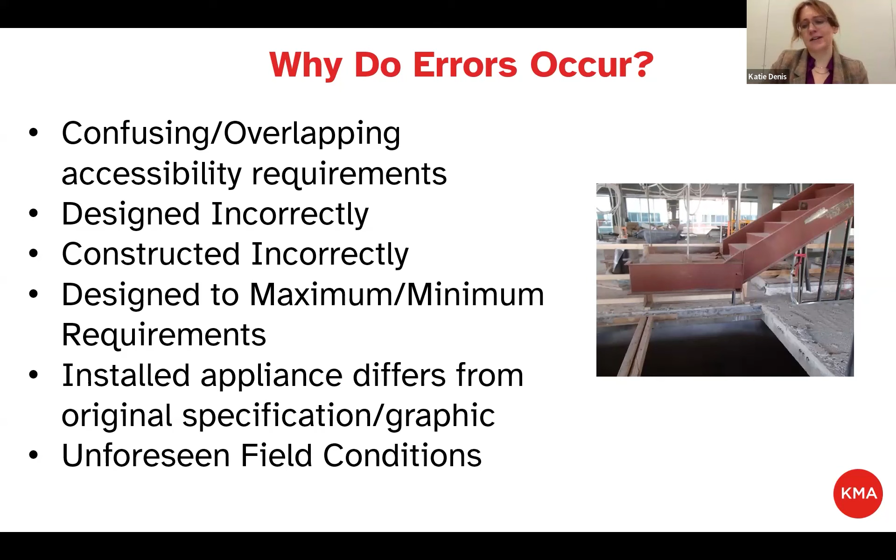Before I get really into the meat of the presentation, I'm sharing all of this not because I'm expecting you to learn all of the dimensional and code requirements today, but instead to put these ideas in your brain space so that when you have a project in your town, you may ask the question, what about accessibility? You'll remember back to this PowerPoint and go, hey, Katie said something about toilets or sinks, let me look back on this presentation, or let me reach out to one of the resources she gave, so that you can avoid these types of errors.

So let's start with multiple codes and standards. In Massachusetts, we have 521 CMR. 521 CMR is part of our building code. It is enforceable by the Massachusetts Architectural Access Board and local building officials.

It does have a process for applying for a request for a variance when not in compliance. In order to receive a variance, you have to prove technical infeasibility or significant cost without substantial benefit to people with disabilities. So it's a pretty high standard to get a variance, and it goes through the board. They review the application and can ask for follow-up. I share this because it's not as easy as just, oh, we'll get a variance—it is an involved process.

But there are a few typical variances we see in multifamily projects, and that includes Group 1 sink depths. Currently, the regulations require sinks to be 6.5 inches deep in all your units, but most projects choose not to install those shallow sinks and instead install deeper sinks, which requires a variance. And electrical outlets at glass window walls—if you have a project where there's a glass window wall and the outlets underneath the wall can't be within reach range, that's a common variance we see as well.

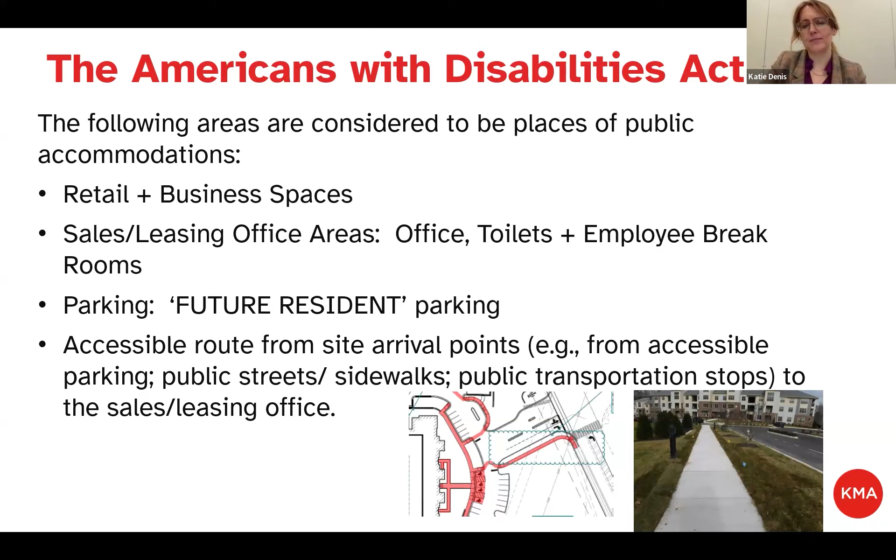If there's any retail in your multifamily project or business spaces, the ADA would also apply there. And also it applies to the route from the street to the leasing office. So those are the main areas that the ADA applies.

The other big accessibility requirement in Massachusetts is the Fair Housing Act, a federal civil rights law that provides protection from discrimination when renting or buying a home or apartment. There are several protected categories per the Fair Housing Act, including people with disabilities. It's enforced by HUD, and to ensure you're not discriminating against people with disabilities, you have to design and construct your projects to meet a certain standard per the FHA.

The design and construction requirements of the FHA apply to new construction after March 13th, 1991, for projects with 4 or more units. With an elevator, it's all the units in the project. If it's not an elevator building, it would only be the ground floor units.

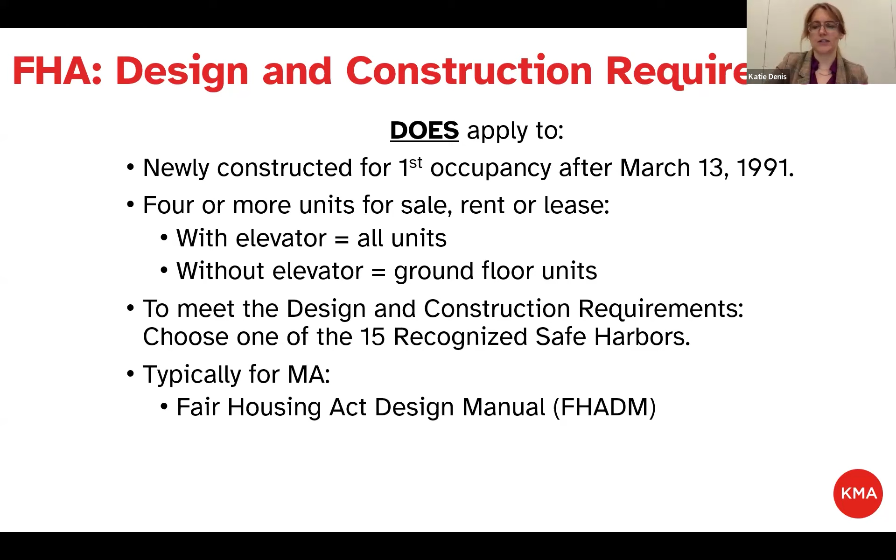To meet the design and construction requirements, you have to choose one of 15 recognized safe harbors. In Massachusetts, we generally recommend following the Fair Housing Act Design Manual because it most closely aligns with 521 CMR, your state accessibility code.

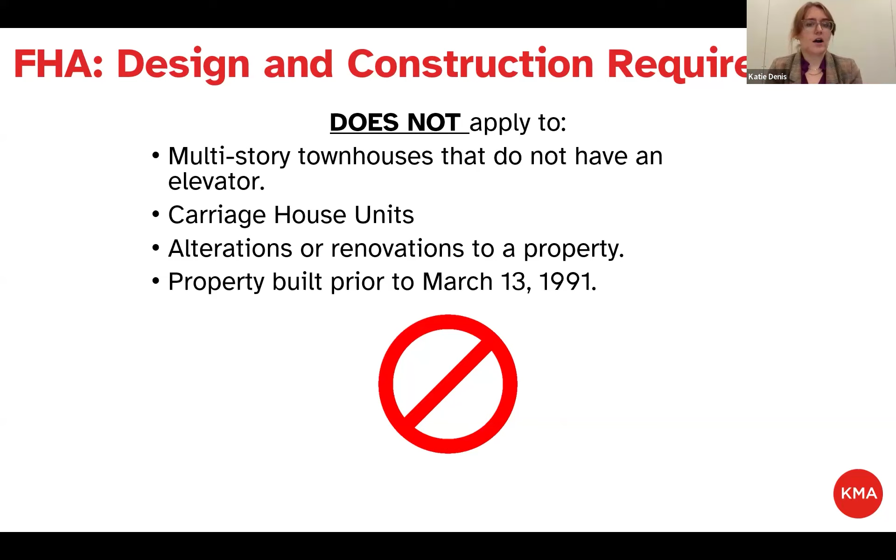The design and construction requirements do not apply to multi-story townhouse units without an elevator, carriage house units, which are units with a garage underneath, or alterations or renovations to a property built prior to 1991.

There are 7 main requirements in the design manual: an accessible building entrance, common use and public areas, usable doors, accessible routes through units, controls in accessible locations, reinforcing in the bathrooms, and usable kitchens and bathrooms. We'll get into these in more detail in a bit.

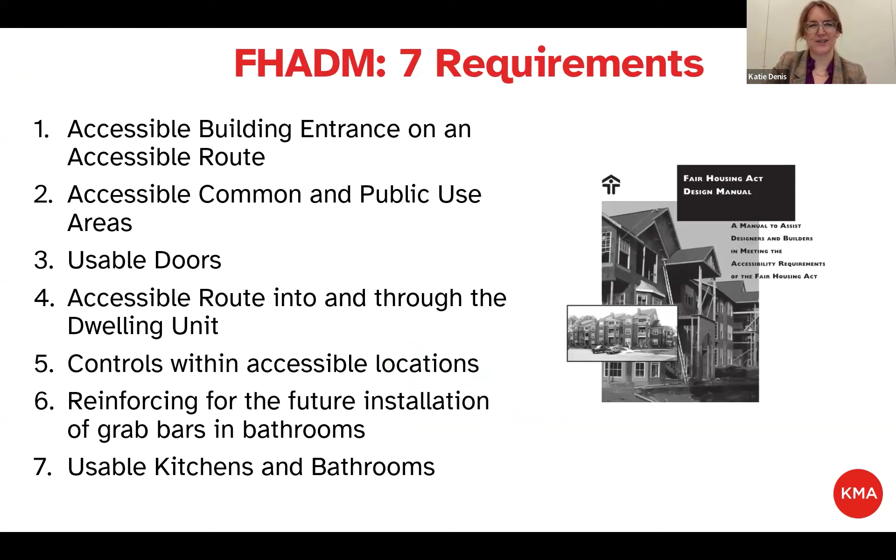To summarize, in Massachusetts we have the FHA that applies when there's 4 or more units to all covered units, and the MAB or 521 CMR that also applies to 5% of the units for Group 2 if there's more than 20 dwelling units, with the rest being Group 1. The only exception is again elevator buildings, where all units are covered; if there's no elevator, it's just the ground floor. The ADA also applies to areas open to the public, such as the leasing office or any retail spaces.

With all that in mind, one of the most common errors we see is early on in the design phases. Here's an example of an electric outlet that was located incorrectly in the drawings, and when it was built, it was also located incorrectly. So we highly recommend doing plan review and vetting your teams to ensure they're thinking about accessibility early and often.

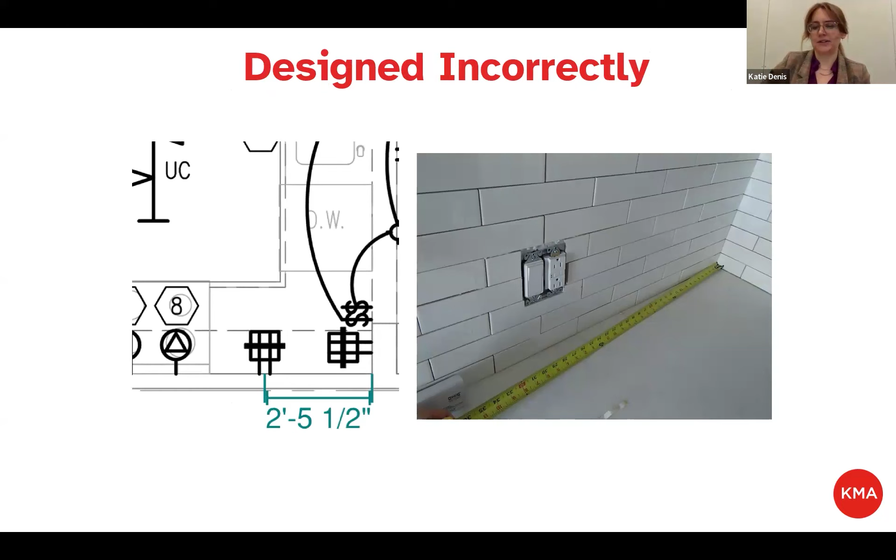Tolerances are something that get brought up frequently in multifamily construction, and Massachusetts is one of the only codes that has tolerances built in. So I've listed them here from 521 CMR. For example, when you have a dimension between 0 and 2 inches, you have an 1/8 inch of tolerance in either direction. It's important to note that these tolerances do not apply to minimum or maximum dimensions.

That's because the AAB is assuming the minimum and maximum are already giving you a pretty good range. The other thing to note is tolerances don't apply to the FHA or ADA, which both reference that tolerances exist but neither define them like 521 CMR does. Some projects choose to use these tolerances as a risk management strategy, but it's project dependent, and the black and white of the code says this would only apply for 521 CMR things and not FHA or ADA.

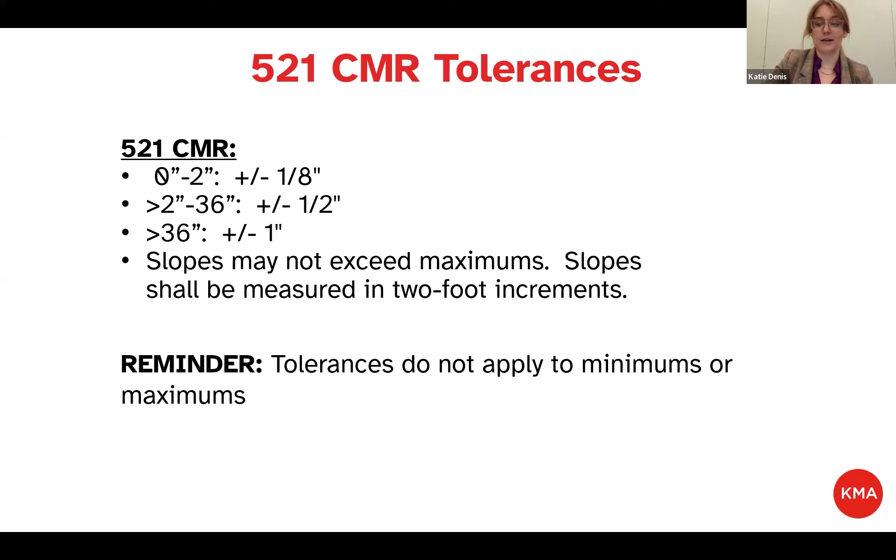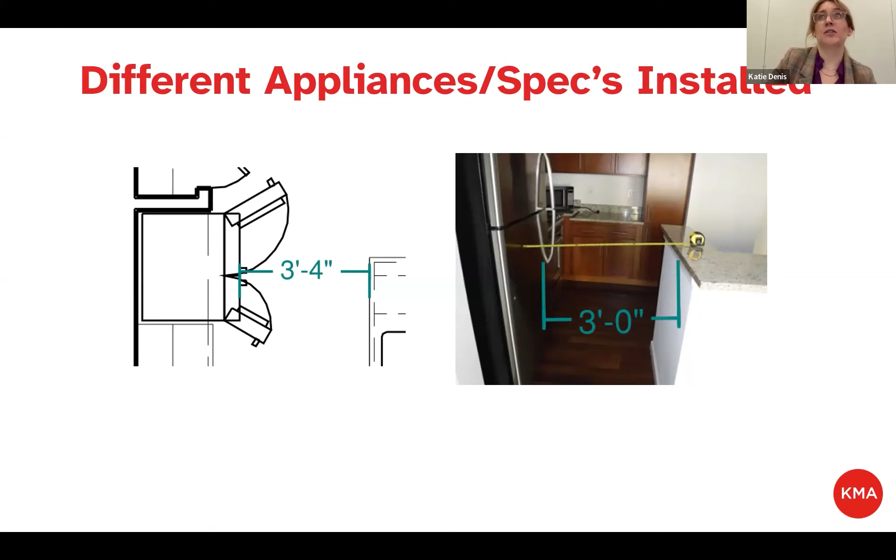Another common error we see is different appliances being spec'd and installed than what is drawn in the drawings. Here's an example where the drawings show a fridge providing the required 40 inches of clearance; however, the spec'd appliance only provides 36 inches when installed, creating an issue. So it's important to review all these things at the initial project phase, as well as throughout the project, to ensure compliance.

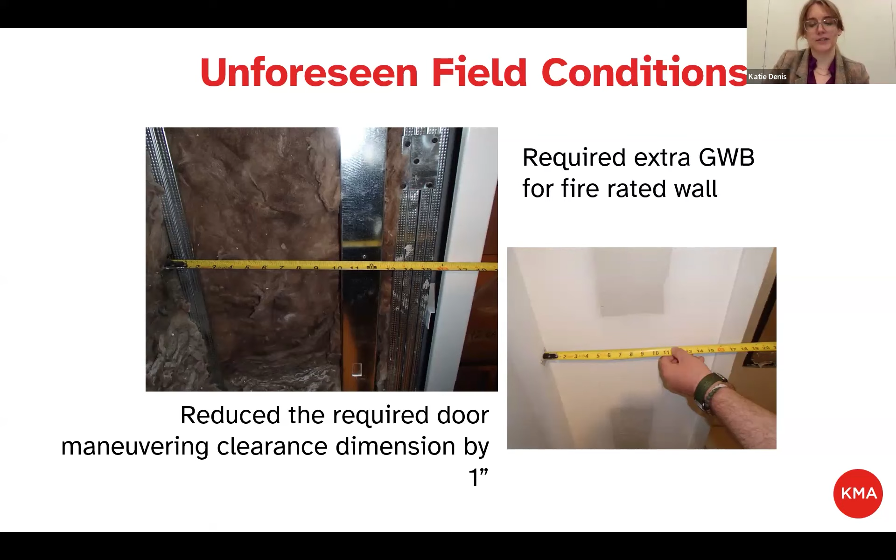The last thing I wanted to talk about before getting into what's required where is affordable housing. I know a lot of MBTA communities are also looking at affordability, and there are different triggers depending on the type of project for accessibility when it comes to affordability. If the project is part of a local government program, such as a local housing authority, it's required to comply with the 2010 ADA standards at the unit portion. So while the ADA generally applies to leasing and public areas, if it's affordable and part of local government, it also applies to the units and amenity spaces.

Similarly, Section 504 of the Rehab Act of 1973 applies if the project is receiving federal financial assistance. Section 504 says you can either comply with UFAS or the 2010 ADA standards. Generally, we find a lot of projects are required to comply with both Section 504 and Title II of the ADA. So we recommend following the 2010 ADA when affordability requirements are tripped.

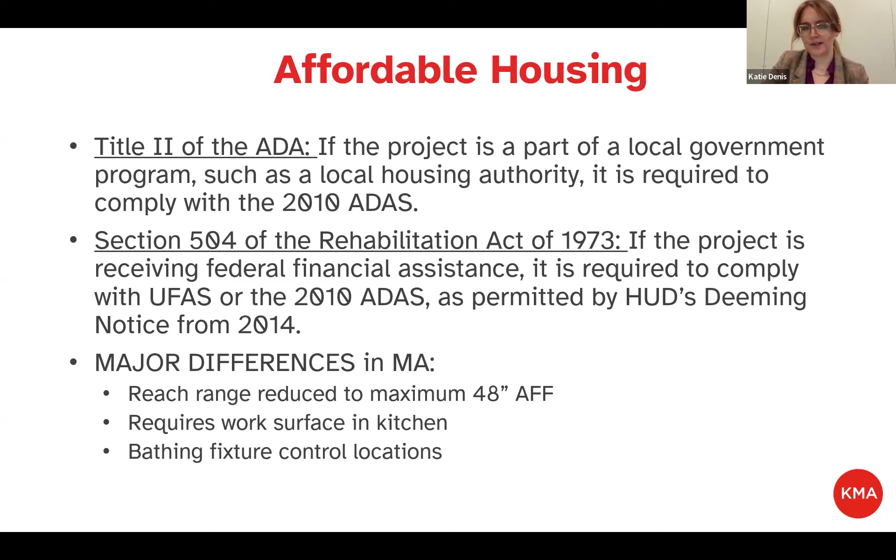The major differences here aren't huge, because you already have a pretty stringent base code in Massachusetts. They include the reach range being reduced to 48 inches if following the ADA standards. Both UFAS and the ADA standards require a work surface in the kitchen, which is not required by 521 CMR or the FHA. And they both have different bathing fixture controls than required by 521 CMR or the FHA. Those are things to keep in mind, but generally the layouts align with those of a Group 2 unit, with a lot of similar features.

So let's get into some of these requirements, starting with common use and amenity spaces. The first is walkways and sidewalks. 521 CMR requires all walkways and all entrances to be accessible. This is surprising to many projects in Massachusetts, so I'm sharing this information here.

If you have a walkway or entrance that cannot be made accessible, it's potential to receive a variance for that condition, but you have to prove either technical infeasibility or significant cost without substantial benefit to people with disabilities. If stairs are used on a site, an adjacent accessible walkway or a variance is required. I know in Massachusetts things get hilly, so anytime you see a stair, make sure you're putting an adjacent accessible route to it.

The accessible route has a 5% maximum running slope and 2% maximum cross slope, with very few exceptions. It has to be minimum 48 inches wide, and it includes curb ramps. 521 CMR and the ADA standards have a whole set of requirements for curb ramps that should be looked at early and often.

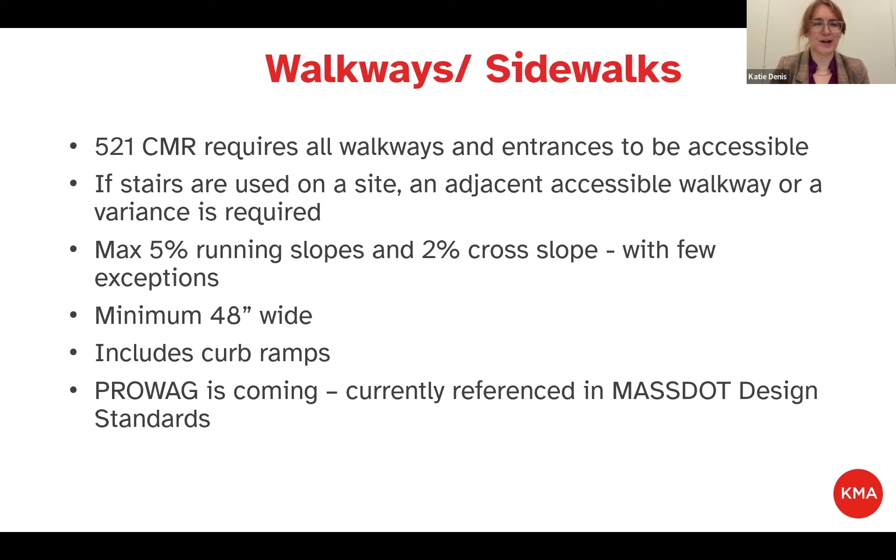The last bullet here is PROWAG, the Public Rights of Way Accessibility Guidelines, passed by the Federal Access Board. I believe it's waiting on Congress or someone to memorialize it to make it enforceable, so currently it's not fully enforceable, but it is coming. I'm sharing this because this standard has significant impacts on public rights of way and sidewalks in municipalities and at multifamily housing projects. PROWAG is currently referenced in MassDOT's design standards, so if you're doing any MassDOT sidewalks or work, you should already be looking at PROWAG, and if not, this is a good nudge to start doing so.

Accessible routes give you a lot of exposure on a project because they are visible to anyone driving on the property, visiting the property. It's a really obvious place for error, and it's a common place for litigation because it is so easy to see.

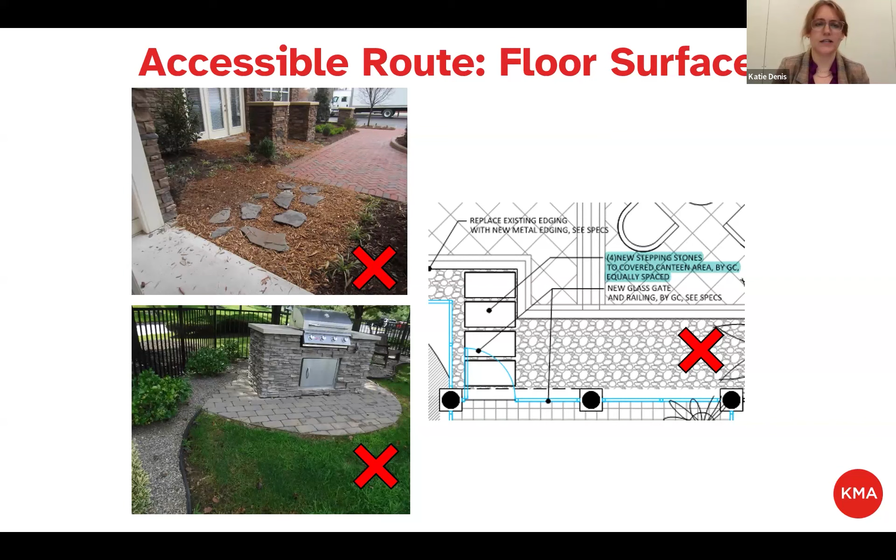Accessible routes have to have a floor surface that is stable, firm, and slip resistant. Here are three images of surfaces that do not meet any of those. Grass does not count as a stable, firm, and slip resistant surface. Neither does mulch or rocks. It has to be something like concrete or a paver patio, something that won't sink or squish or slip.

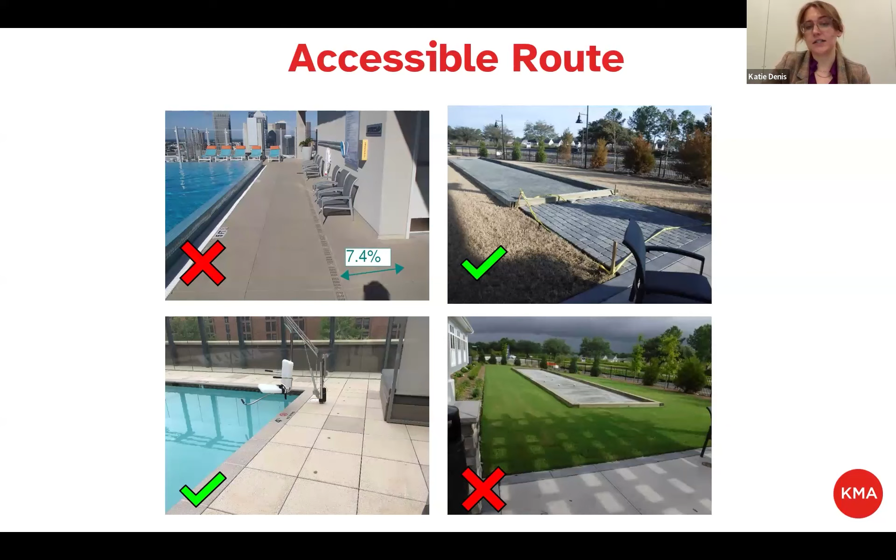So again, thinking about this early and often, reviewing your pools, reviewing your drainage, making sure there's no cross slopes is critical. On the bottom right, there's a bocce court, and the route to it is grass, so that would not constitute a stable, firm, and slip-resistant surface. You would have to think of either paving that or creating a way to get to that bocce court that doesn't require traversing the grass.

Accessible parking is another area that really impacts a lot of our multifamily projects. 521 CMR for multifamily, Chapter 10, says all parking spaces have to be capable of being made accessible at tenant request in the future. So where that really comes into play is in the early design phases - you have to be thinking about your garage, because with that requirement, any space in that garage could potentially be made a van space and needs 8'2" vertical clearance. If you can't provide 8'2" vertical clearance in your garage, you could potentially apply for a variance by providing that in some spaces, but maybe not all of it.

We also recommend at the start following 521 CMR 23.2.1, which establishes minimum numbers of accessible parking spaces, just so you start off with some set amount of spaces, as opposed to trying to fit them in later at tenant request. FHA requires 2% of each type of parking to be made accessible. The last thing to note about parking is it's categorized by use. So if in your garage you have some residential spaces and some visitor spaces and some leasing spaces, you would have to do your accessible parking counts for each of those uses. It's not a cumulative count unless they all can share all the spaces.

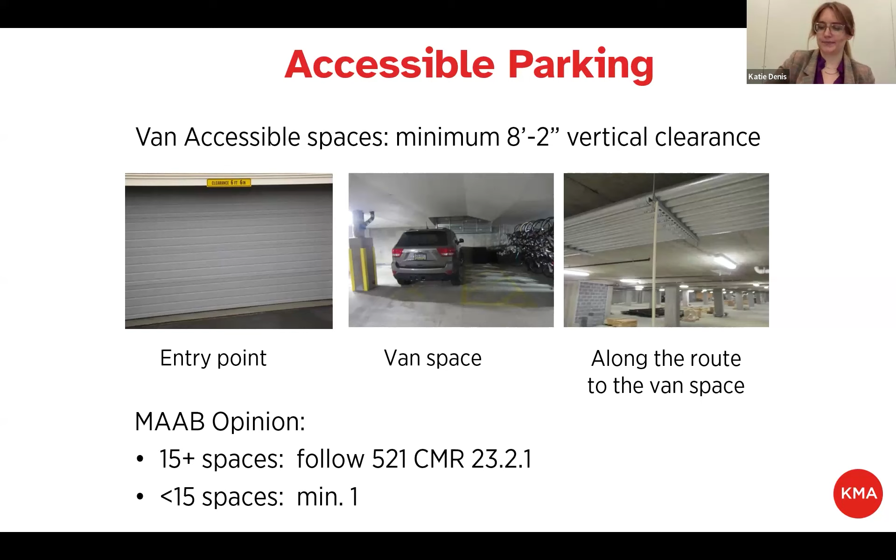EV charging stations are another hot button item we see come up frequently in Massachusetts. There's currently no requirement to have an accessible EV parking space. However, you do need to have an EV charger on a minimum 36-inch wide accessible route, an adjacent level 30 by 48 clear floor space at the controls, have controls within reach range, and have controls that are operable with one hand without tight grasping, pinching, or twisting of the wrist.

There are several funding sources in Massachusetts that I'm aware of that are going above and beyond this requirement. I believe Article 80 in Boston has certain EV charging credits you can get that would also require an accessible space for an EV charging. So it's important to look at the funding sources and the different zoning requirements for EV charging, because this may go above and beyond the minimum accessibility requirements.

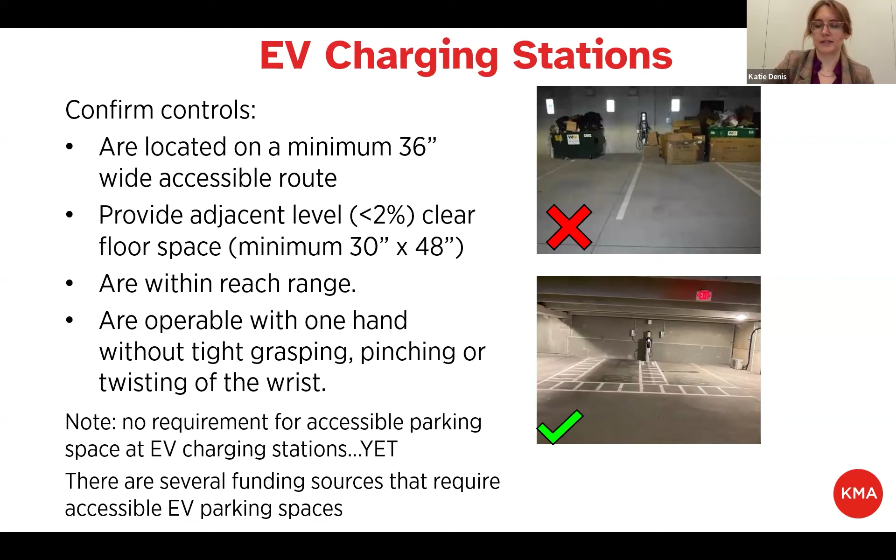Playgrounds. In Massachusetts, an accessible route is required to and around the play equipment.

Engineered wood fiber is not considered a stable, firm, and slip-resistant surface per the MAAB. The MAAB has a long history of reviewing playground surfaces, and they've established since the 90s that engineered wood fiber is not an acceptable surface. Instead, surfaces like pour-in-place rubber or GrassMat are compliant.

This is surprising to many. I know there are many playgrounds out there, many playground manufacturers still putting this wood fiber surface in Massachusetts, but it is not permitted. If you're at a project that has a playground open to the public, not just residents and their guests, the ADA standards also have additional requirements for the play equipment itself. Depending on the project, the ADA may apply, and it has more stringent requirements about the equipment, requiring things like transfer stations, ramps, elevated play components, ground play components, etc.

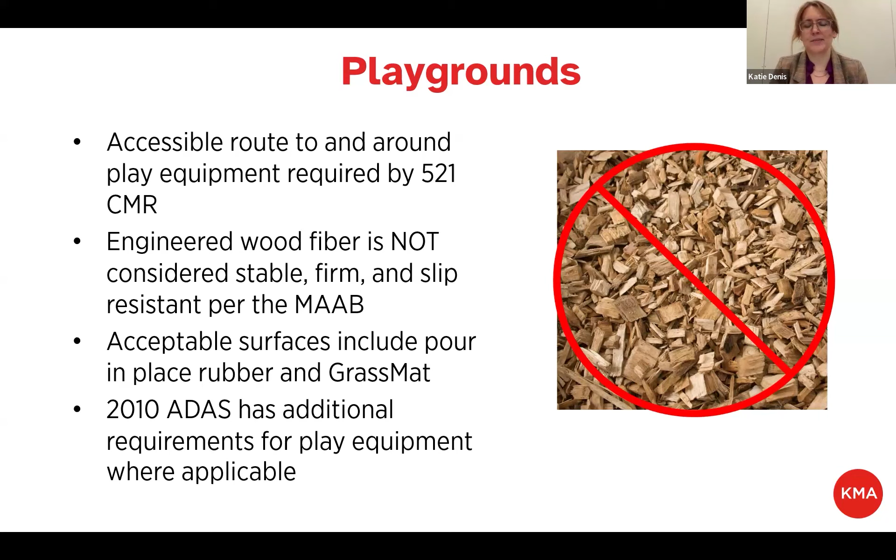Trash in multifamily. A common theme throughout this presentation is controls have to be operable with one hand without tight grasping, pinching, or twisting of the wrist, and within an accessible reach range. That's a pretty standard requirement for any controls intended to be used by residents. So you should be ensuring whatever type of trash system you have, if it's intended to be operated by residents, the controls are operable and within reach range.

A lot of times we'll see in these trash rooms in multi-level elevated buildings this kind of trash chute system. These trash chute systems sometimes require you to push and hold a button as well as turn and pull the handle, and that would not be compliant because it requires more than one hand to operate. So thinking about trash and your trash systems in your project early and often is advisable.

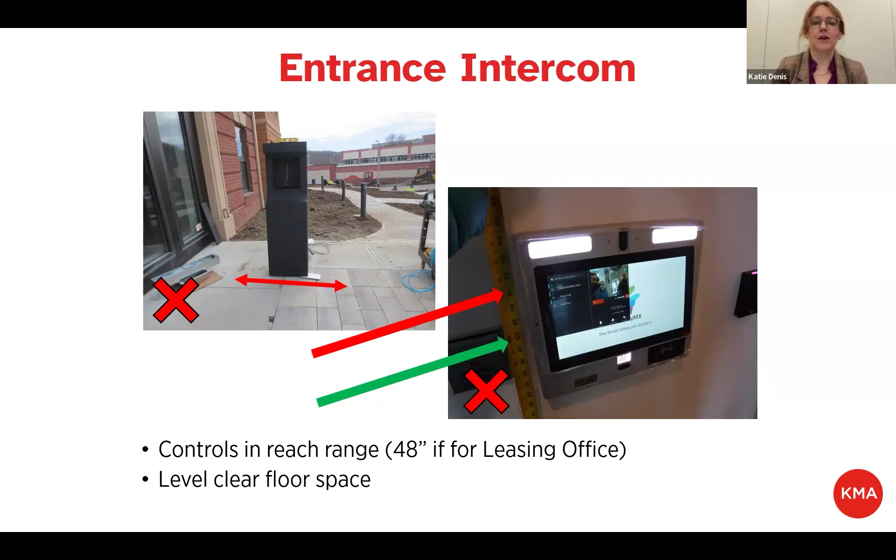In addition, you should have a level 30 by 48 clear floor space at any controls intended to be used by residents. That 30 by 48 dimension is the approximate size of a wheelchair—you'll hear it often throughout this presentation—and it is required to be adjacent to controls so you can park and use whatever it's serving.

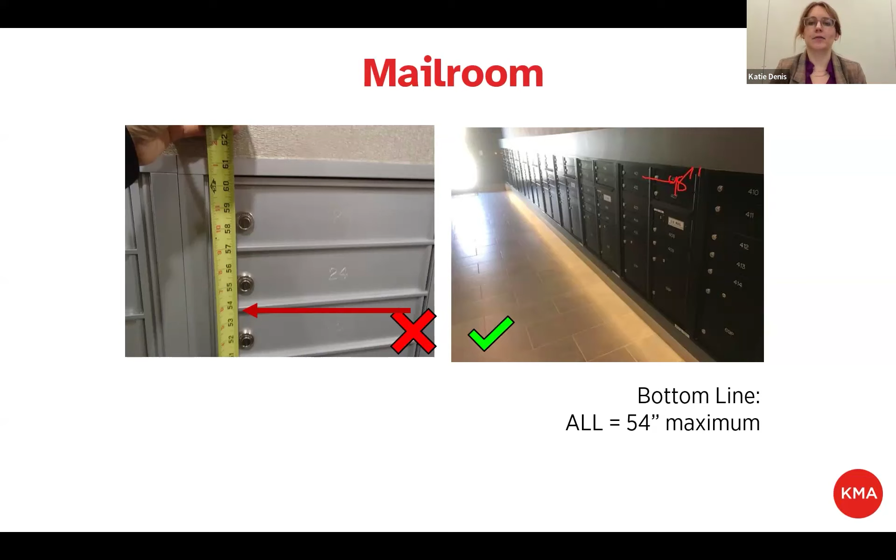Mailboxes in Massachusetts have to be a maximum of 54 inches to the center line of the highest operable lock. This is surprising to many—I know this isn't done on every project in Massachusetts, but it is a requirement. So mailboxes serving covered units have to be within reach range. Where this gets a little tricky is with the USPS, which has its own separate set of requirements—I believe they require the mailboxes to be a minimum of 28 inches above the finished floor. So when you couple those two requirements together, you do have a pretty large mailroom if you have a lot of units in your project.

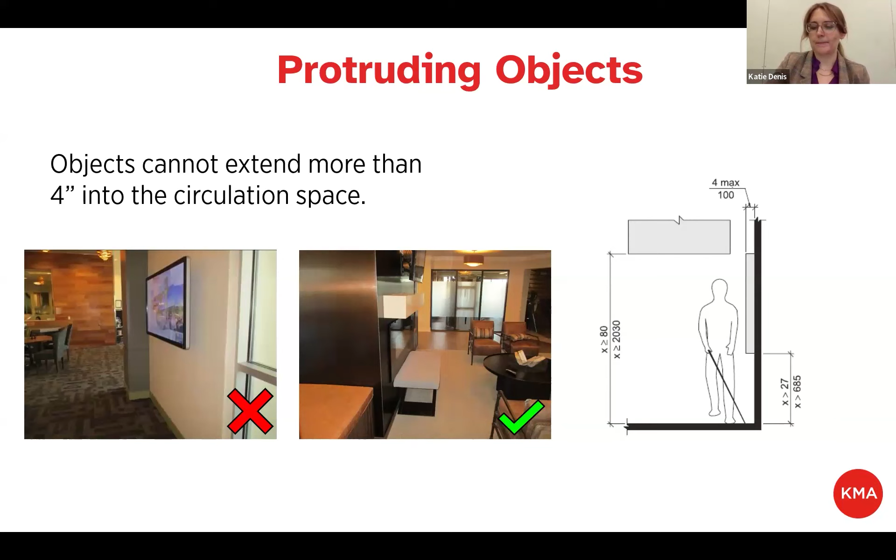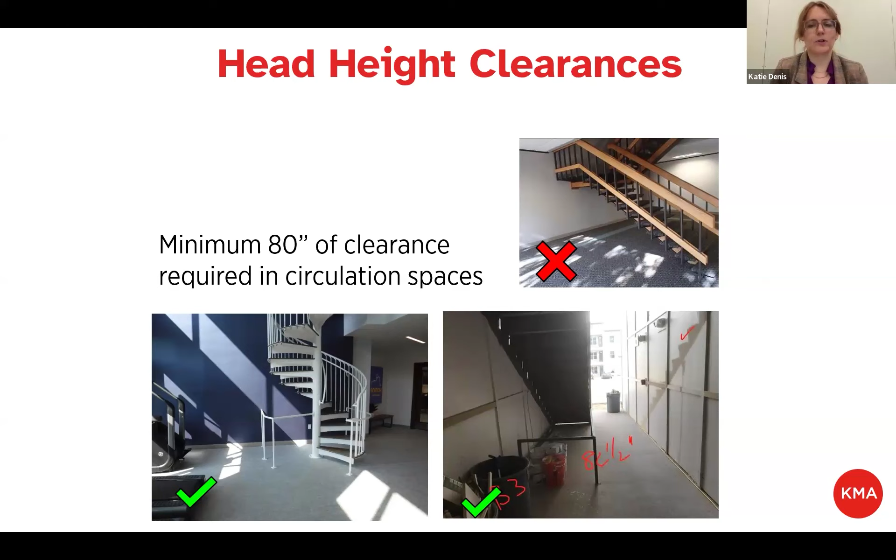Protruding objects is another area we see often in multifamily projects and elsewhere. Objects can't extend more than 4 inches into the circulation space between 27 and 80 inches above the finished floor. Frequent protruding objects we see are wall-mounted televisions, fireplace mantles, and sometimes artwork. If any of those stick out more than 4 inches, you should install cane detection below them. Similarly, head height underneath stairs has to be a minimum of 80 inches, and if you can't provide that, you should provide some sort of cane detection so someone with vision loss can't just traverse underneath the stair and hit their head.

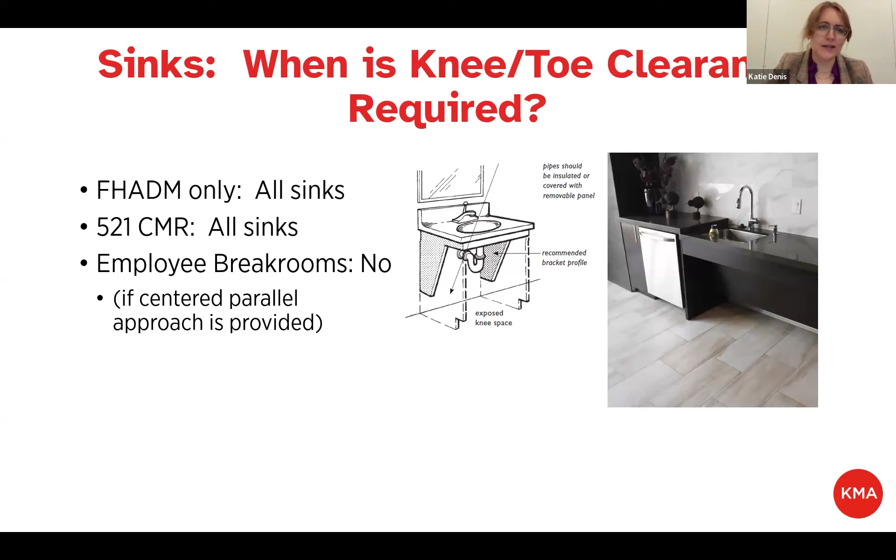Sinks: in common use and amenity areas in Massachusetts, all sinks require knee and toe clearance for a forward approach. So anywhere you have a sink, like a kitchenette or a bar in your amenity space, you need to provide knee and toe clearance for a forward approach. The only exception would be an employee break room, in which case you'd only need the knee space if you can't provide a centered parallel approach—and that's an ADA-only requirement, not 521 CMR or the FHA.

Tables and seating. Anywhere you're providing tables in a multifamily project or otherwise, you should ensure you're providing accessible tables and accessible seating areas. An accessible seating area has a top surface between 28 to 34 inches above the finished floor, with minimum 30-inch wide by 27-inch high by 19-inch deep knee and toe clearance. Think of it like a rectangle underneath those dimensions.

521 CMR has the more stringent requirement here, and it requires each type of seating to be accessible. So if you have a bar counter without service in a multifamily project, you need a lowered section of bar counter, as well as an accessible table if you're also providing tables in that area.

Signage is also required per the accessibility requirements. In Massachusetts, emergency egress signage has to be illuminated and include the international symbol of access at areas of accessible means of egress. This is a common issue we see on Massachusetts projects - not including the international symbol of access. That's something worth considering.

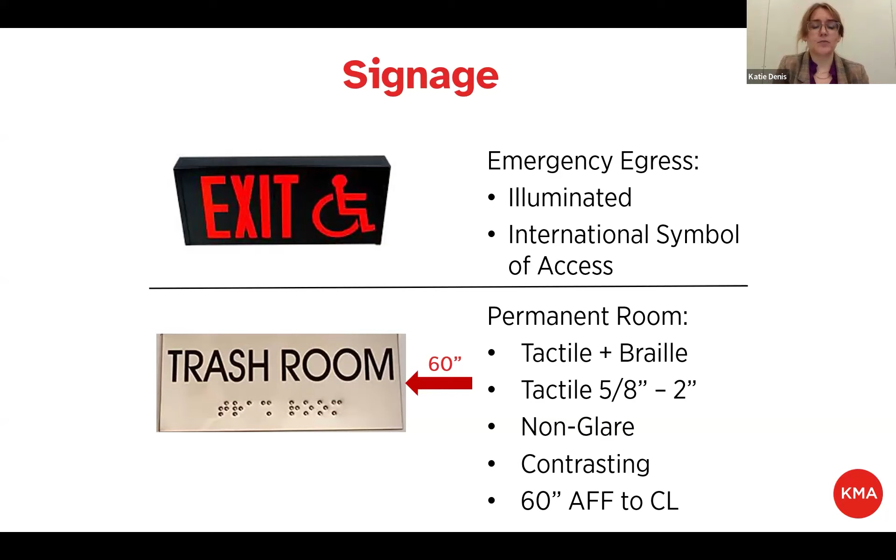Tactile braille signage is also required at all permanent rooms and spaces. So all your unit entry numbers, all your amenity spaces that are numbered and signed, should have signs with tactile braille, and they should be 60 inches to the center line of the sign.

Pet spas are something we're seeing more and more on our projects. It's a good time to be a dog. At the pet spa, you have to make sure you're providing door maneuvering clearances, which I'll talk about in a few minutes, and turning space within the room - you need 60 inches of either a turning circle or a T-shaped turn. You need a level clear floor space at the controls, and the controls within an accessible reach range.

Something important to note about pet spas, though, it really depends on the tub specified for those controls. In most cases, the controls for a pet spa require reach over an obstruction. If that reach is between 10 to 24 inches deep over that tub, the controls can be no higher than 46 inches above the finished floor. So the height gets a little lower once you start having to reach over something. That's important to note.

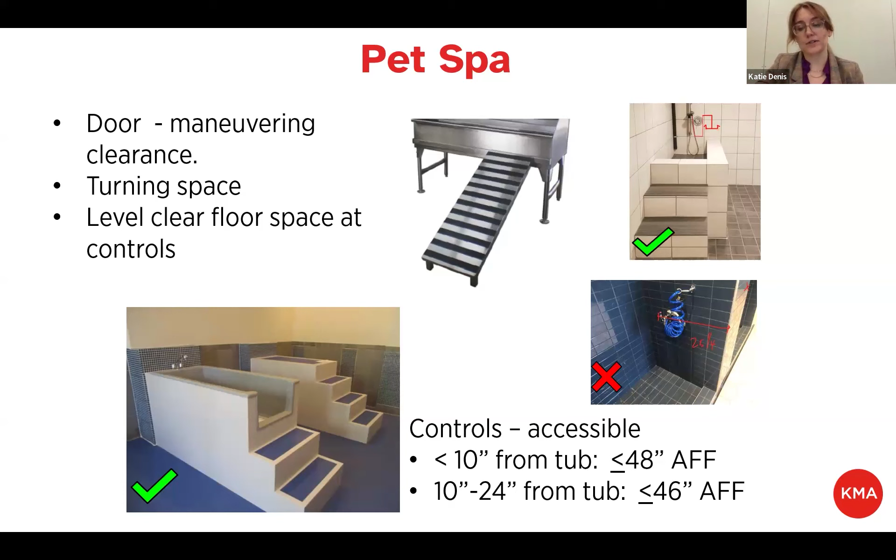Drinking fountains are something we see often on projects, either put in the wrong spot or not enough provided in the correct location. Anywhere you're putting drinking fountains in Massachusetts requires a high-low type - a drinking fountain for a seated user and a drinking fountain for a standing user. The other thing you have to watch out for with drinking fountains is they're often protruding objects. If you're not building them into a wall or providing cane detection on either side of them, they stick out more than 4 inches into that circulation space. That's something to think about in your projects.

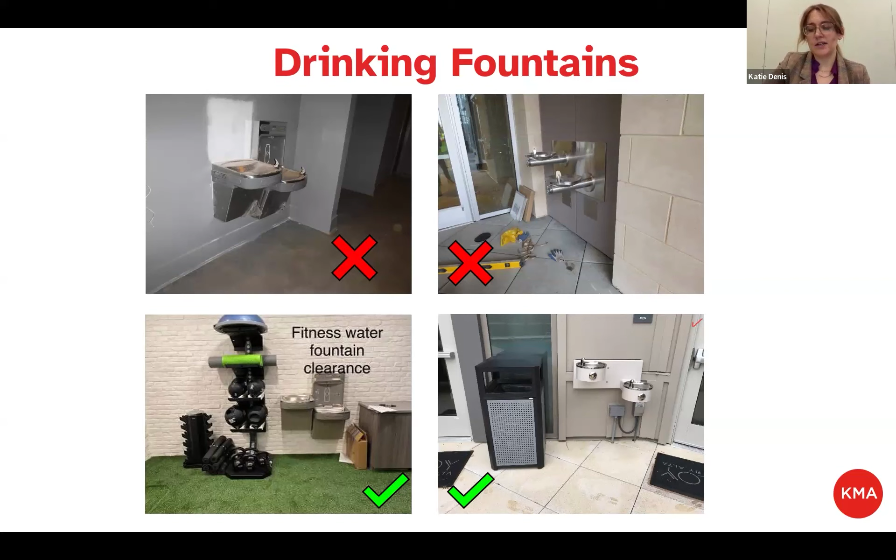Grill timers and emergency shutoffs are another area we see projects do a variety of things on. You want to make sure if your grill timers and emergency shutoffs are intended for resident use, they meet that operability and height requirement we've been talking about - operable with one hand without tight grasping, pinching, twisting of the wrist, and within an accessible reach range, minimum 15 inches above the finished floor to maximum 54 inches. Where we often see this come up is sometimes they'll tuck them underneath the grill behind a cabinet, which usually doesn't work because they're low to the ground.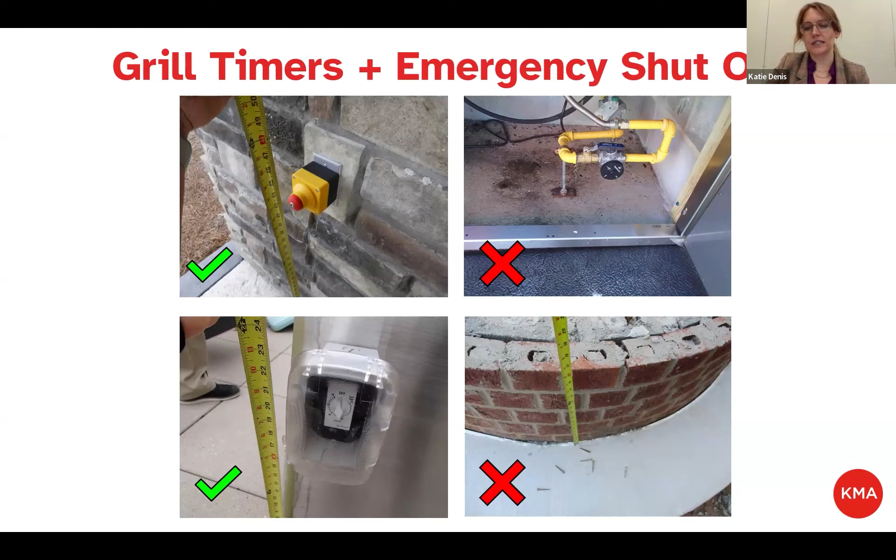Or the controls themselves can be tiny knobs that I have to pinch and turn to operate. So you should really look for either a button style or a paddle style that I can operate with a closed fist. The last area I wanted to talk about relative to common use and amenity spaces are guest suites.

This is something we're seeing come up more and more across our projects. If you're providing a guest suite - a place where if I live at an apartment, I can rent out this guest suite for my guests so they can stay over - you need to make them accessible, which is surprising to many because it's just not something that's being thought about. It requires an accessible bathroom, an accessible kitchen, door maneuvering, turning space, all of that. So I think this is a good question to ask your projects early on if they're planning on providing guest suites and what their plan is surrounding them.

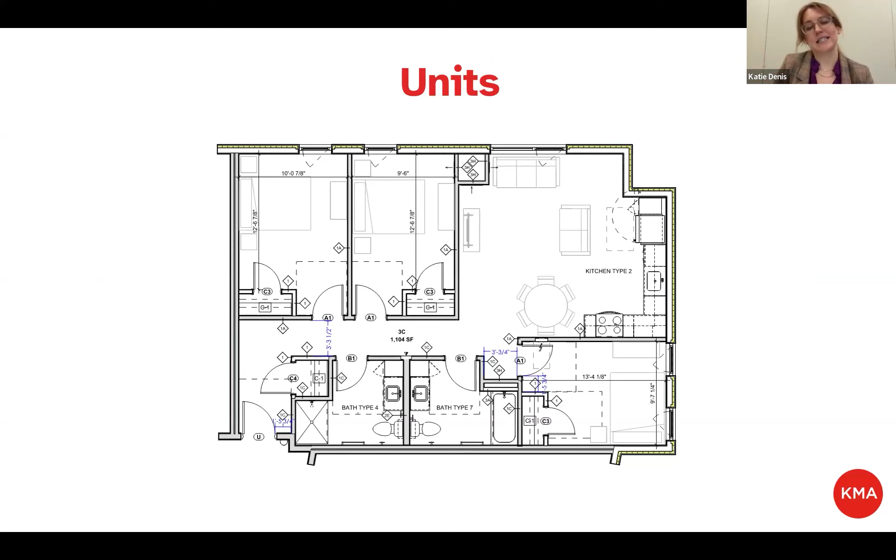All right, so now let's talk a little bit about units. Unit issues are things that repeat a lot and can be where there are significant issues, because if you find something in one unit, you're going to multiply it by either all the units or how many units of that type. So it's really important to get your units right early.

So the unit entry door has to be minimum 32-inch clear width, has to have operable hardware, a peephole, a compliant threshold, and maneuvering clearances on both sides. So here's my slide on door maneuvering clearances.

In 521 CMR chapter 26, you'll see these diagrams which show different clearance layouts for the push and pull sides of the door. So depending on the approach to the door, there's different clearance requirements and you have to make sure you're meeting them.

A couple things to note: door maneuvering clearances in Massachusetts have to be provided within 6 inches of the face of the door. So you have to be careful if you have thick walls or recesses near your door. And the AAB considers spring hinges closers, so some of these door maneuvering clearances require greater depths and clearances if there's a closer. I'm sharing that so you know spring hinges would also require those greater depths.

The clear width of a door and maneuvering clearances are also measured from the base molding. On the bottom right, I stole this graphic from the Federal Access Board, but I really like it. It shows a door and a yellow box that protrudes from the floor all the way up to the ceiling, and that's the area where you would measure door maneuvering clearance. So if you have baseboard or shoe molding within that box, that would not be permitted.

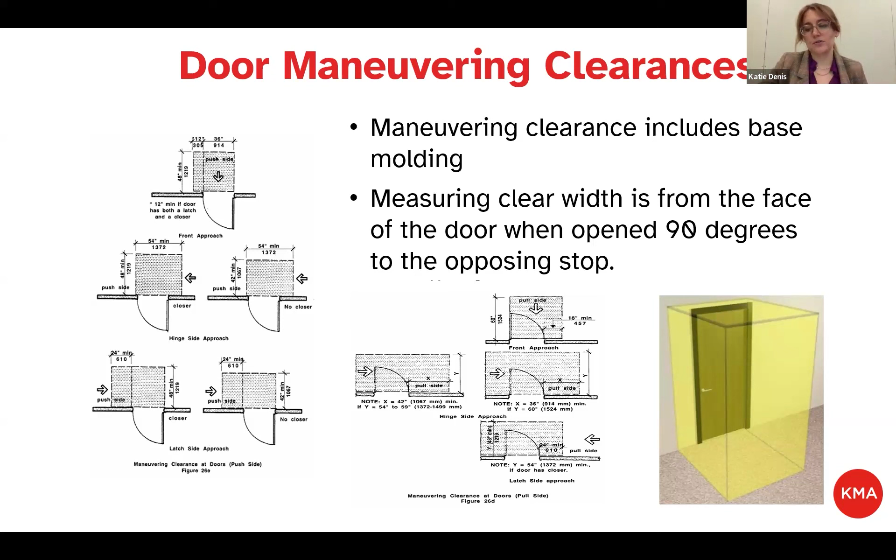Maneuvering clearance, clear width is measured from the face of the door when opened 90 degrees to the opposing stop. So you want to make sure you have 32 inches at your unit entry from that face of the door open 90 degrees to the stop. Typically that involves a 3-0 door.

Here's an example of something that happened on a job site where they had an unexpected grade change at the unit entry, and it created all these issues at the unit entry - these slopes, a non-compliant threshold, a lot of headaches. So again, reviewing these things early and often, I can't emphasize it enough.

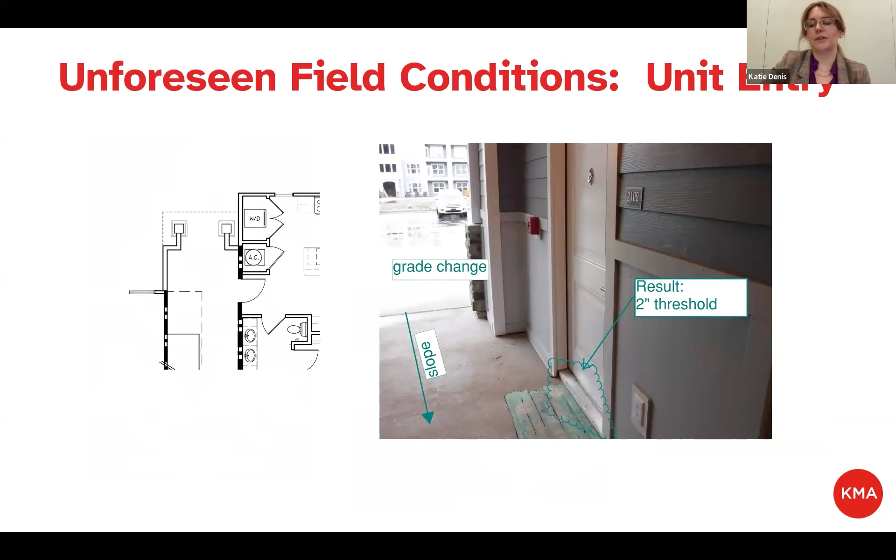In the interior of your unit, your doors also need 32 inches of clear width, operable hardware, thresholds that are compliant, and maneuvering clearance. The exception to some of these, though, is in Group 1 units per 521 CMR. So again, the majority of your units do not need the clear widths, hardware, or maneuvering clearances day one, so long as they can be provided without structural change. So those are something to consider.

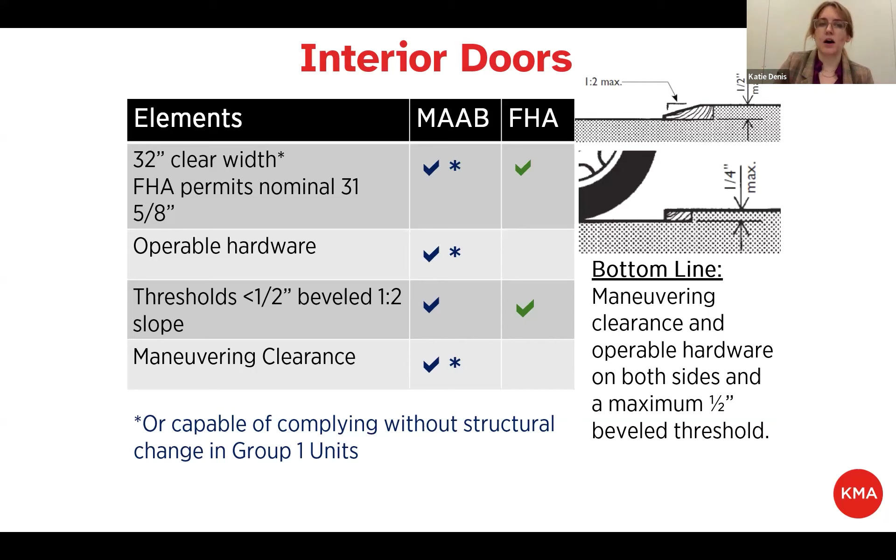Some projects, if they have doors that don't provide the 32-inch clear width, have offered to use an offset hinge, or for doors that don't provide the maneuvering clearance in their current configuration, they can swing the door in the other way. That would be compliant only in a Group 1 unit. In the Group 2 units, those more accessible units, all of these things are required day one.

Closets are a common area we see an issue with clear width. So closets greater than 24 inches deep need to have a minimum 32-inch clear width at the entry door, and that's because it's considered a walk-in closet if it's deeper than 24 inches per the accessibility regulations.

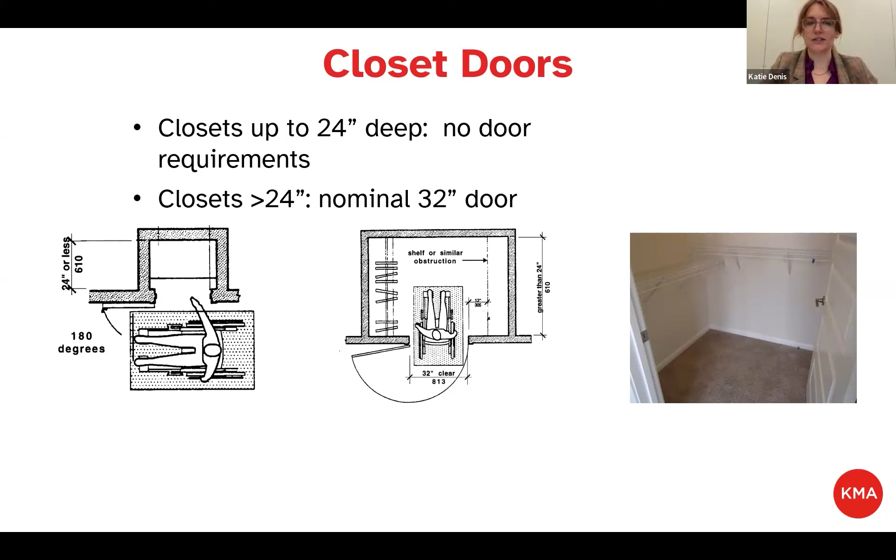Thresholds - this is an area that I have a lot of feelings about. I was recently involved in a long-standing litigation case where a bunch of properties across the country were reviewed for thresholds being 1/8 to 1/4 inch off. And when you think about it, an 1/8 inch in that tiny threshold dimension of a 1/2 inch is a significant amount. So I can't emphasize enough, watch your thresholds.

At swing doors, they can be 1/4 inch vertical or 1/2 inch if beveled at maximum 1 to 2 slope. At sliding doors, again you can do that 1/4 inch vertical, or up to 3/4 of an inch if it's beveled with a maximum 1 to 2 slope. You have to make sure you're watching your interior floor at your thresholds - you're not creating any slopes greater than 2%.

And somewhere I'm seeing this come up a lot too is passive house. So there's a lot of projects in Massachusetts that are going for the passive house certification.

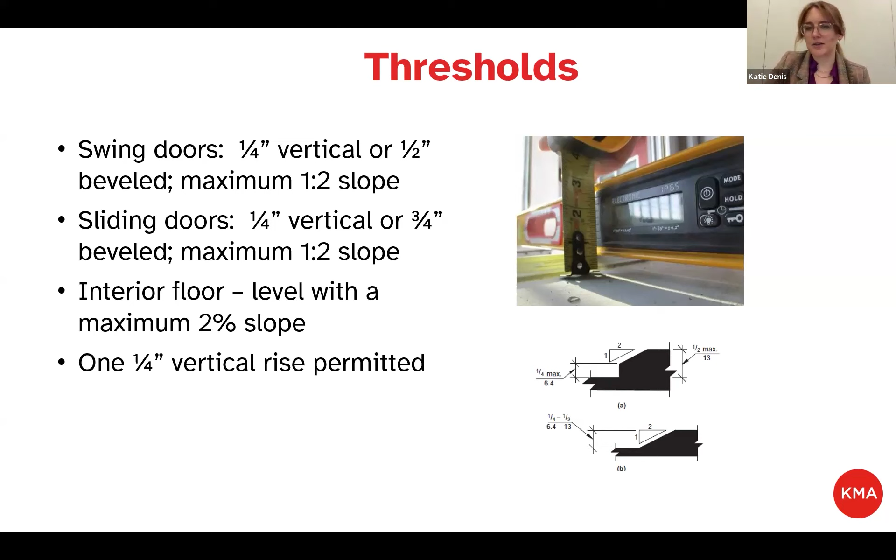Unfortunately, the threshold requirements are not frequently thought of, especially at balconies. I'm sharing that now because there's nothing worse than when I get onto a job site when it's done and it's beautiful and their thresholds are all wrong and they have to figure out a plan to address them. So again, thinking about this early and often, I can't emphasize it enough.

At balconies, on top of the threshold requirements, you're also permitted a change in level. If your balcony surface is pervious, so water can get through it, like decking or pavers, you're allowed a 1/2 inch change in level between the balcony surface and the unit interior finish floor. If the balcony surface is impervious, meaning water can't get through it, like concrete, you're allowed a 4 inch change in level from the balcony surface to the interior finish floor. The reason behind this significant change in level is the idea that you could build on top of it at tenant request, but you can't do that at a pervious surface. So that's the difference there. But it's important to remember at your unit balconies, you're allowed the change in level and the threshold requirements. You need to meet both.

Here's an example of a project that had an issue with balcony thresholds. They measured 1 inch from the subfloor, and then they decided to just throw a bunch of gypcrete right at the balcony threshold itself and created slope issues, up to 5.1% slope. So they ended up having to rip out the floor and feather that gypcrete back about 5 feet to gain the height needed to make that threshold work. Again, continuous reviews of these types of things prevents ripping things out, which is costly and painful in the future.

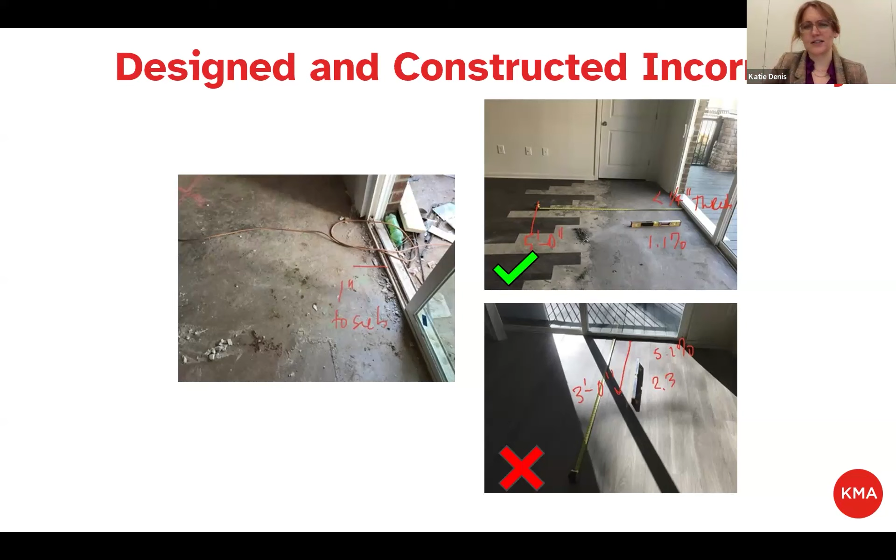Accessible routes: in your unit, you need a 36-inch wide accessible route to all elements, including the bedroom. You need an accessible route to one side of the bed, and the bedroom has to be capable of providing 60 inches of turning space.

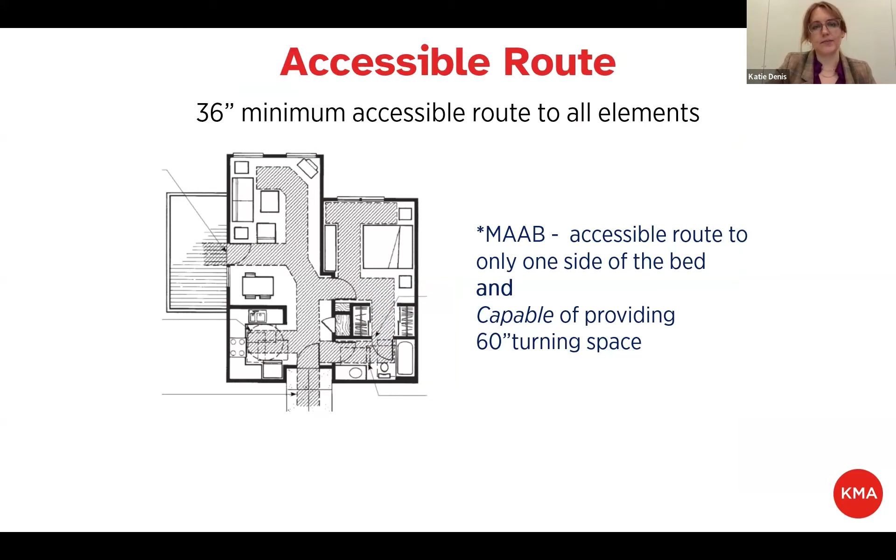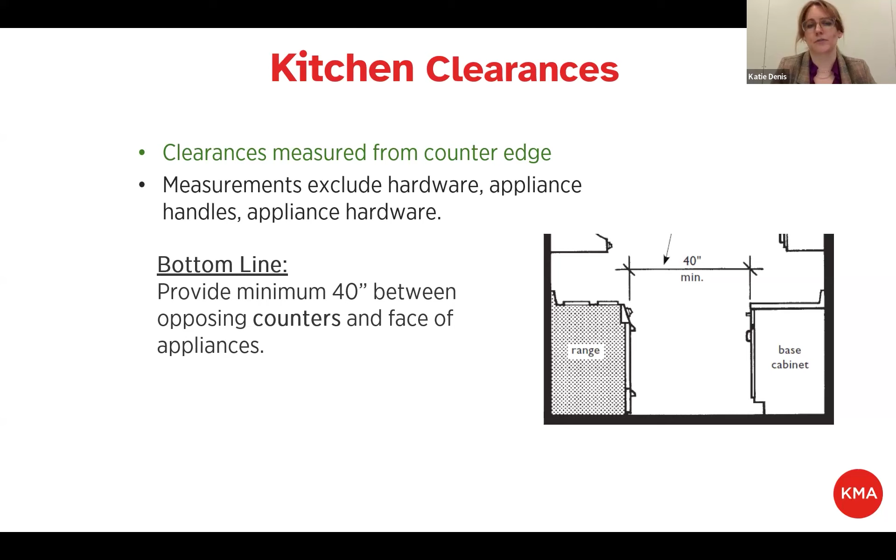In your kitchens, you need 40 inches of clearance between opposing elements. This excludes hardware. That's a common question I get, like, do I measure my 40 inches from the refrigerator handle or the face of the refrigerator? The answer is the face of the refrigerator. So that's something important to remember.

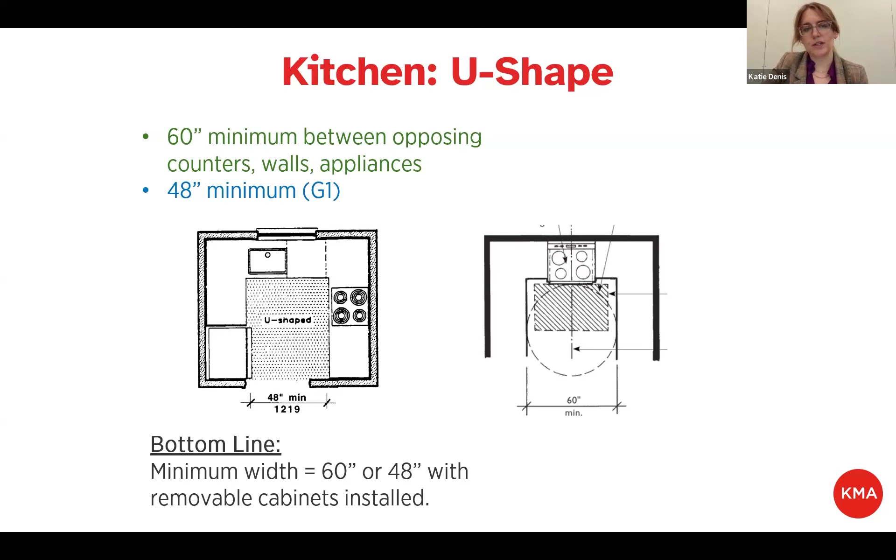If you have a U-shaped kitchen, you need 60 inches minimum between opposing elements. You are allowed to reduce down to 48 inches if you have removable cabinets installed at the base of the U. So the idea is if I can't provide that 60-inch turning space, but I do provide removable cabinets at the base of the U, I can reduce down to 48. That can be helpful if you have a project being built in a really tight location.

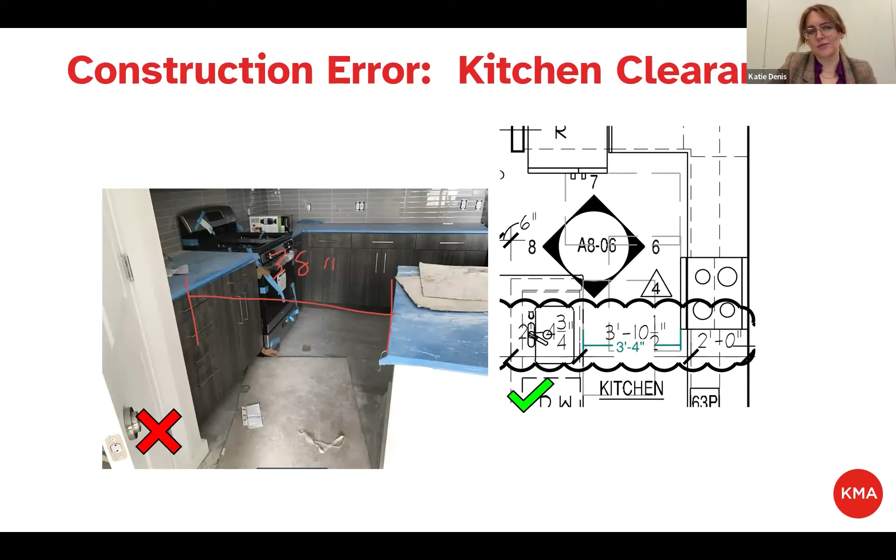Here's an error we saw in construction: the plans note 40 inches between the face of the counter and the opposing range, but when we got to the field, it was only 38 inches between the island and the counter. So that is an issue. Again, constant checkups on these things are needed, even though the drawings had it right, things change. So keep an eye on it.

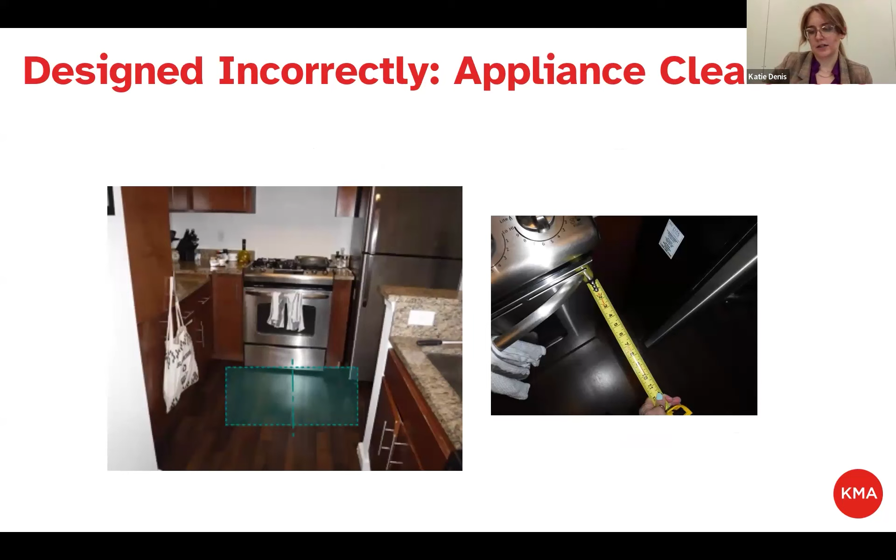Here's an example of an appliance that was designed incorrectly. Here we have a range next to a refrigerator, and the refrigerator protrudes out beyond the face of the counter and the range. That refrigerator protrusion obstructs the required clear floor space at the range appliance. These are things to watch out for.

Removable cabinets are not required unless you can't provide a parallel approach for the FHA. It would only be required at sinks. The AAB requires all cabinetry to be removable, but their definition of removable is very broad—it just says without structural change. So as long as I can remove those cabinets without structurally changing the building, that would be compliant per 521 CMR. So removable cabinetry is more stringent for the FHA, which requires easily removable cabinetry when you can't provide a centered parallel approach, and that would only be at your sink.

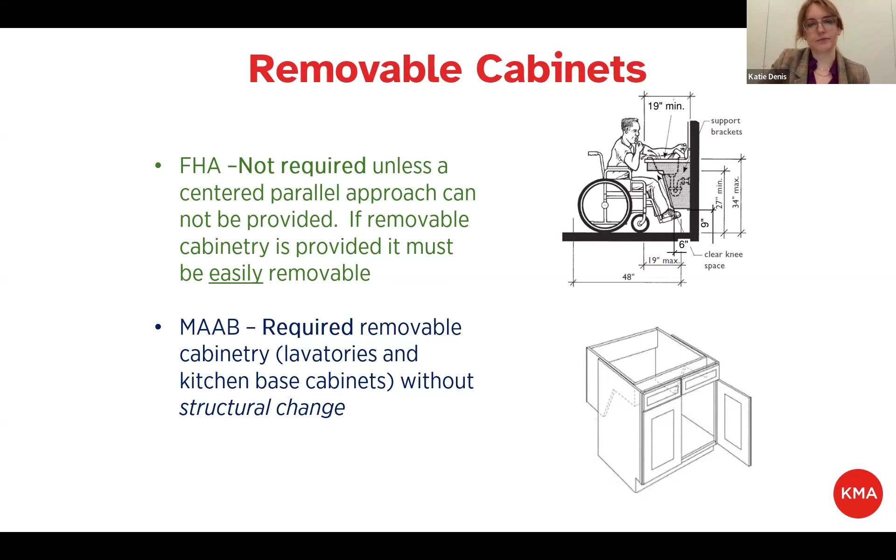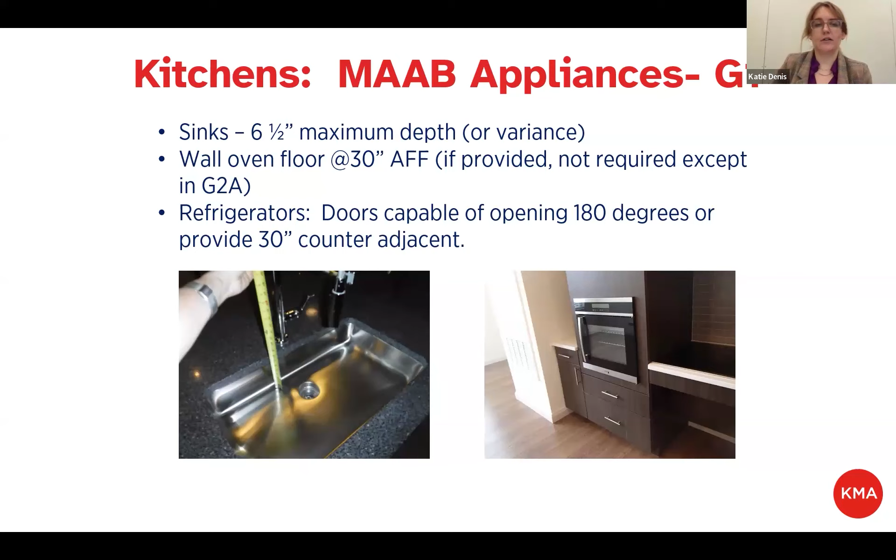AAB has a bunch of requirements for group 1 units. We talked about sink depth earlier, so 6.5-inch maximum depth for all sinks, unless you get a variance for group 1 units. If you have wall ovens, the floor of the wall oven has to be 30 inches above the finished floor. And refrigerator doors have to be capable of opening 180 degrees, or an adjacent 30-inch counter is provided.

Your group 2 units, which are the more accessible units, require the sinks to be 6.5 inches deep, which is required. And for the group 2 units, the AAB does not frequently give variances for those, so those should be 6.5 at construction.

A wall oven is required in the group 2 units. You can't use a range appliance. And the floor of the wall oven is required to be 30 inches above the finished floor. Cooktops are required because, again, you can't have the range appliance. And refrigerator doors have to be capable of opening 180 degrees. They have to provide an adjacent 15 inches of counter space, and the freezer floor has to be maximum 44 inches above the finished floor.

When 521 CMR was written or last updated in 2006, bottom freezer type appliances were not the status quo yet. So if you want to use a bottom freezer appliance in a group 2 unit, a variance is required.

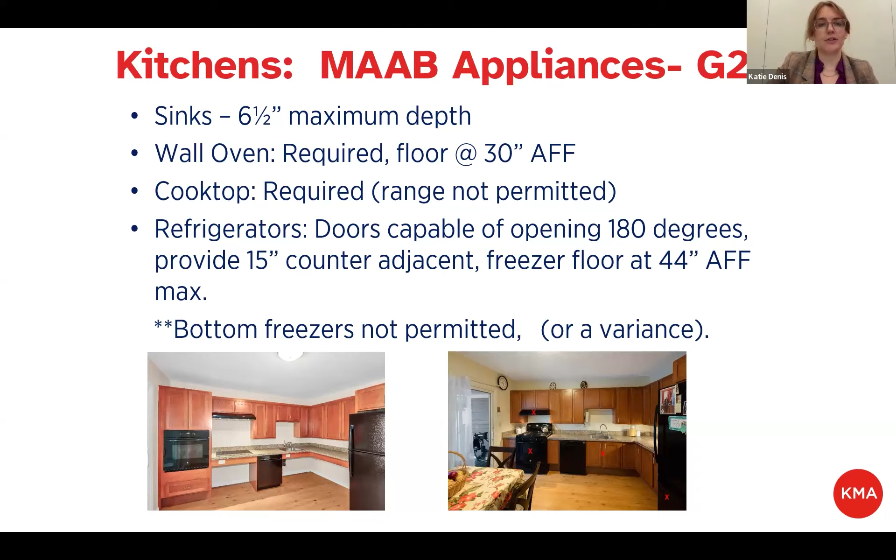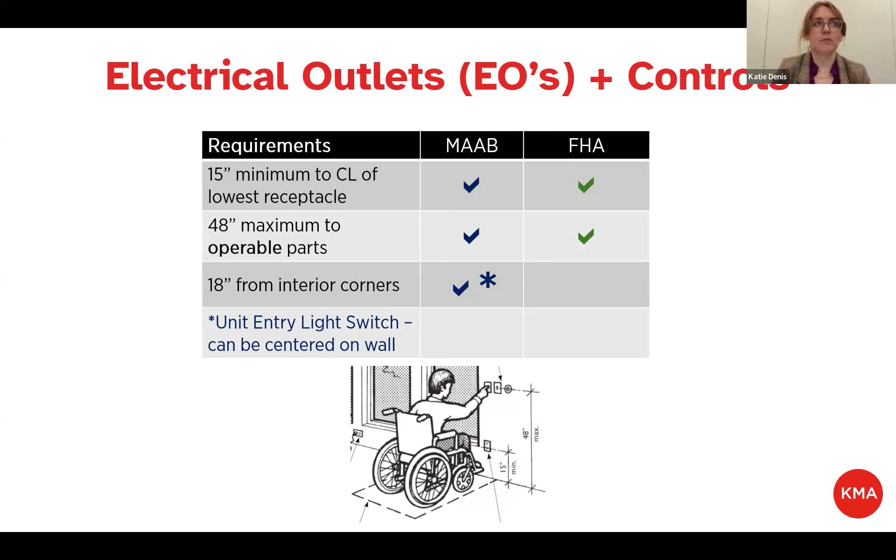Here's some examples of construction errors we see: over a counter, the electrical outlets have to be maximum 44 inches to the center line of the highest plug in Massachusetts. So here we can see this is a 36-inch counter plus 11, so that's more than 44 inches. Thermostats are often spec'd at 48 inches to the center line, but if you have buttons above that 48-inch center line, that would make the thermostat not compliant.

We frequently see outlets and switches too high or too low, especially at balconies. You should be measuring from where the pavers or the finished surface is going to be installed.

At kitchens, 44 inches to the center line of the highest receptacle is required per 521 CMR, and that 18-inch minimum from an interior corner is required per 521 CMR. In addition, the FHA requires a minimum 36-inch outlet over an L-shaped counter section. So anywhere you have an unbroken piece of counter that turns 90 degrees, you need at least one outlet somewhere over that counter section that's minimum 36 inches from the interior corner. This can be really difficult to meet with the overlapping electrical code and the 18-inch requirement per 521 CMR. But I've seen projects do it.

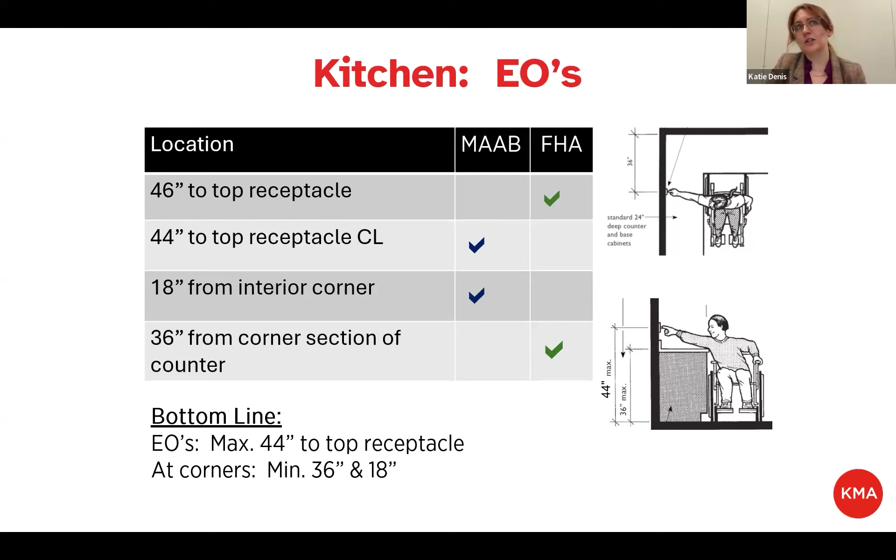Some projects choose to go for a variance for this condition. So these are things just to think about.

The last thing about electric is panel boards. So if intended for resident use, the panel boards have to be 48 inches to the highest operable control and minimum 24 inches from a corner for group 2 units and minimum 18 inches for group 1 units. In group 1 units, you can locate the electrical panels in other locations if you have sufficient wiring to relocate it in the future.

I've been doing this for over a decade now. I've never seen someone put wiring to relocate an electrical panel, but it is an option to you. You could be the first.

And then the last set of requirements we're going to go through is toilet rooms. So all toilet rooms, regardless of whether they're required to provide clearance layouts, which we'll get into in a minute, are required to provide blocking. That blocking has to be 32 to 38 inches above the finished floor.

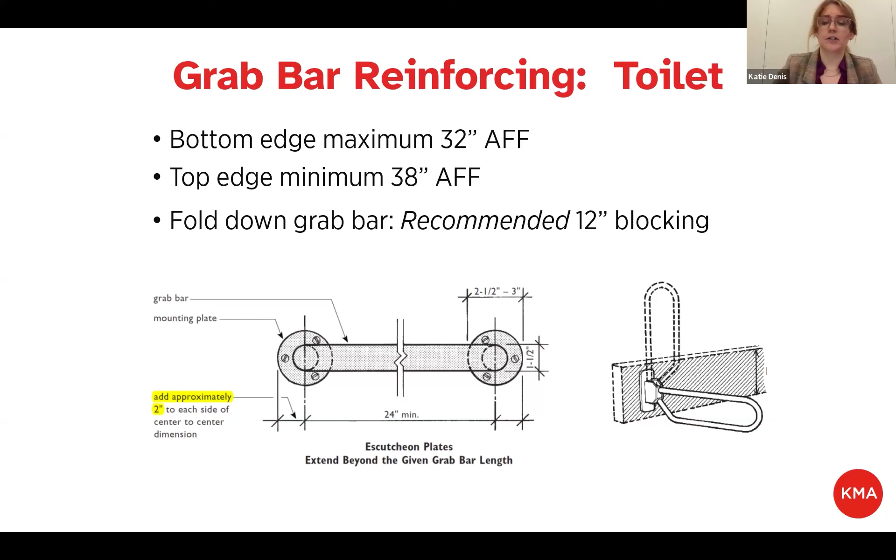It should be 12 inches high if you're going to use a swing down grab bar. So for toilets, it should start from the interior corner to 6 inches beyond the widest part of the toilet, again for the future installation of a grab bar. So all the walls should have this blocking, so if a resident requests it, they can put a grab bar.

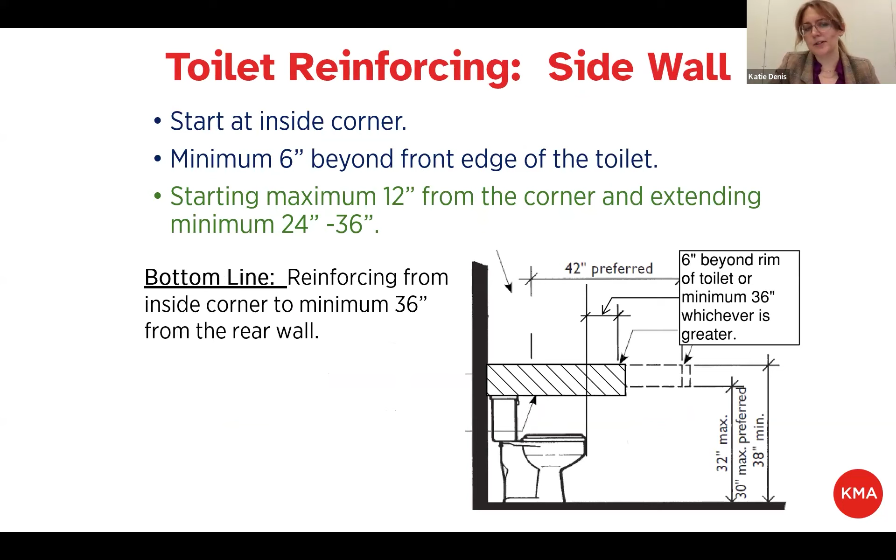Similarly, the sidewall should have the blocking from the interior corner to 6 inches beyond the face of the toilet, or minimum 36 from the rear wall, whichever is larger if you have the space.

Tubs require reinforcement on all walls. For group 1 units, it's 6 inches above the tub rim to 48 inches above the tub bottom. In group 2 units, it has to be 60 inches above the tub floor on all walls.

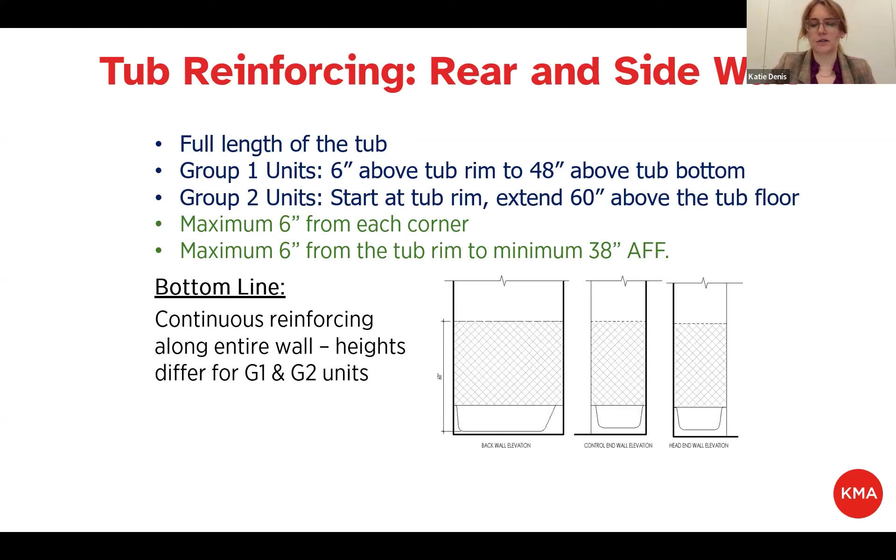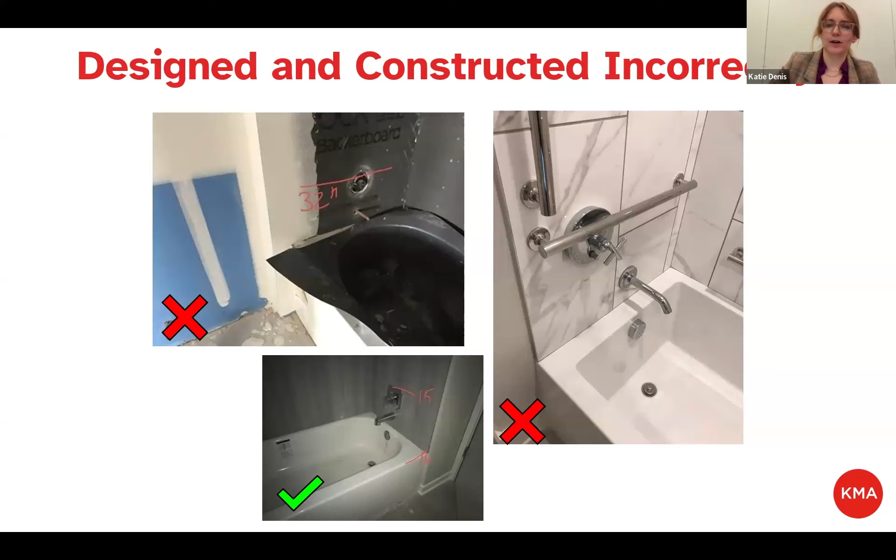A common issue we see is the tub controls being in a location where the future grab bar will be installed. So if you have a tub control located between 33 to 36 inches, that is the typical location of a grab bar. That could be a potential issue. I know there's a building inspector in Massachusetts flagging this, so keep it in mind in your projects. You can put it below the grab bar or above.

Showers require reinforcing on all walls, 6 inches above the finished floor to 48 for the group 1 units. And for the group 2 units, it's all 3 walls, 60 inches from the floor. So a little bit more stringent for those accessible units.

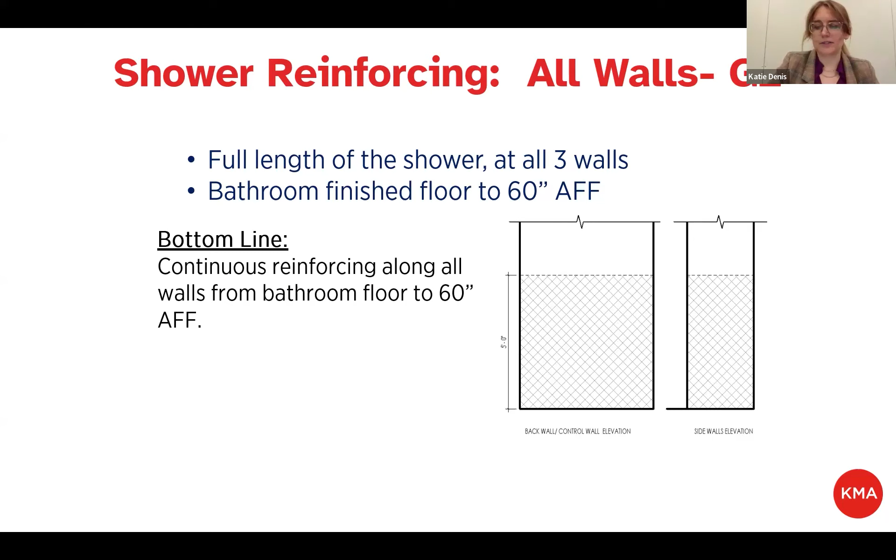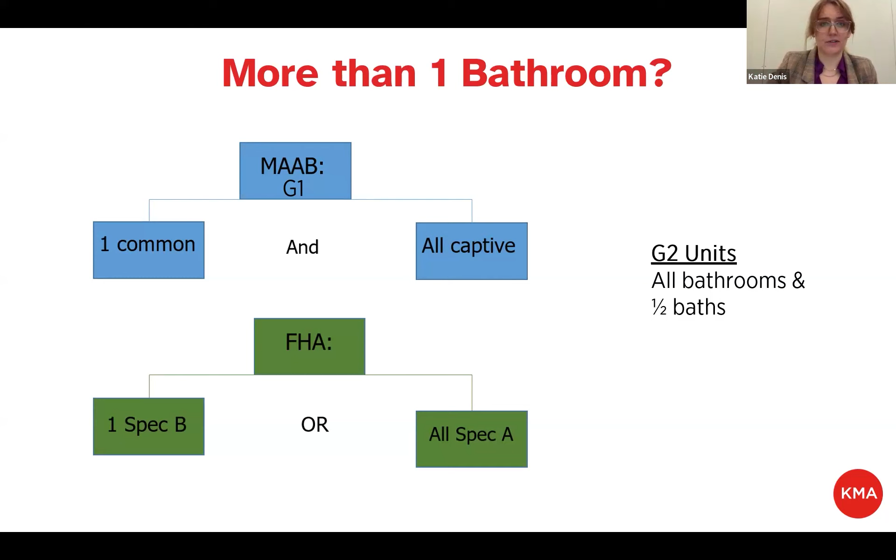However, if you have multiple bathrooms in your unit and you have a sink at 34 inches and a parallel approach at your bathing fixture, then that bathroom meets spec B and the other bathroom is not required to meet the layout requirements. The other bathroom would still be required to provide reinforcing and the door clear width, but not clearances at the fixtures.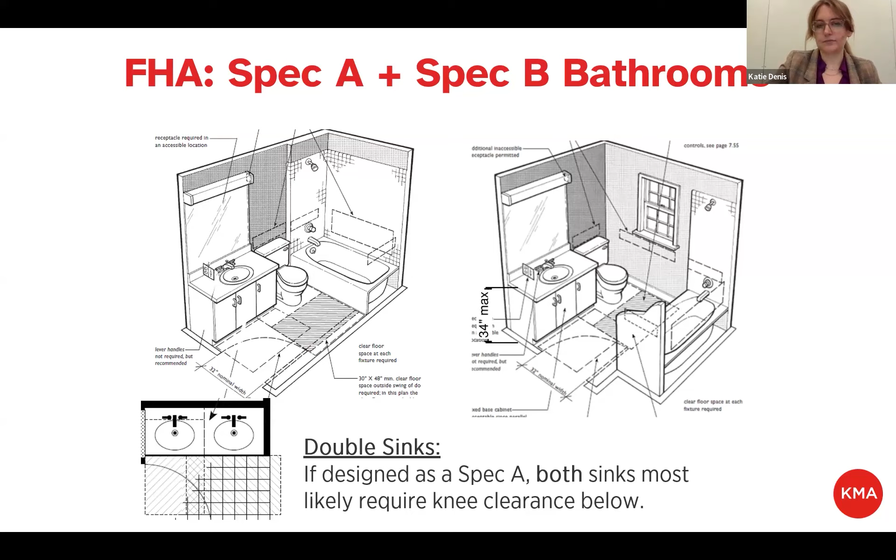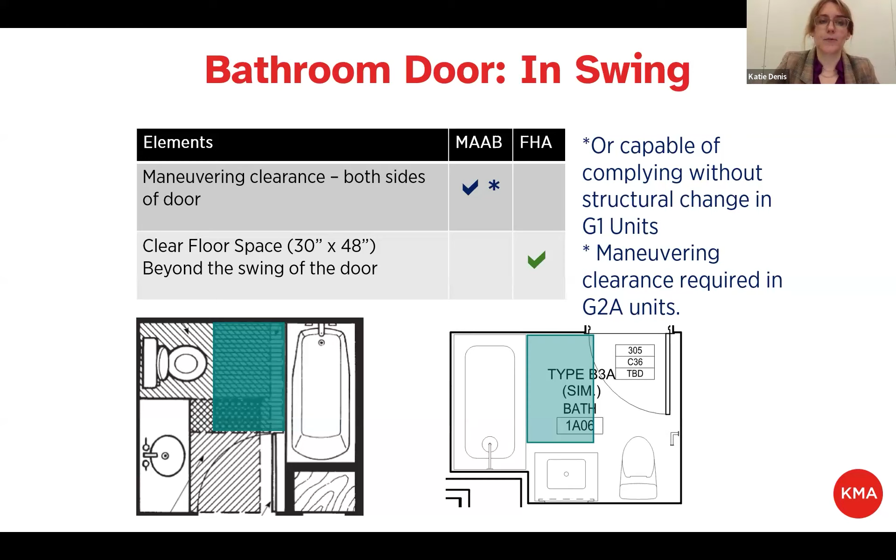So here's a picture of a non-compliant shower or bathroom we've seen where they don't have that 30 by 48 beyond the swing of the door. It's obstructed by the toilet, the door swings into it. I can't fit that anywhere without hitting something. And the idea there is so I can have space to park a wheelchair and then close the door. So it's pretty important.

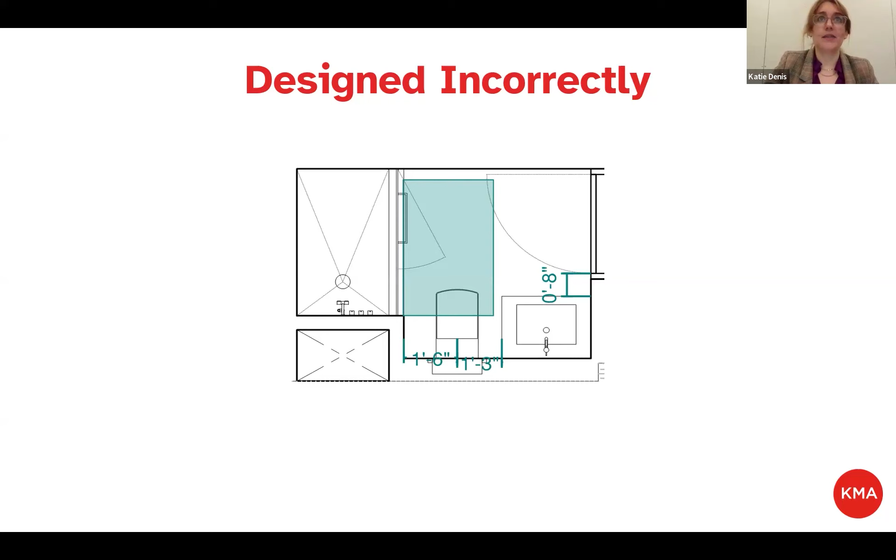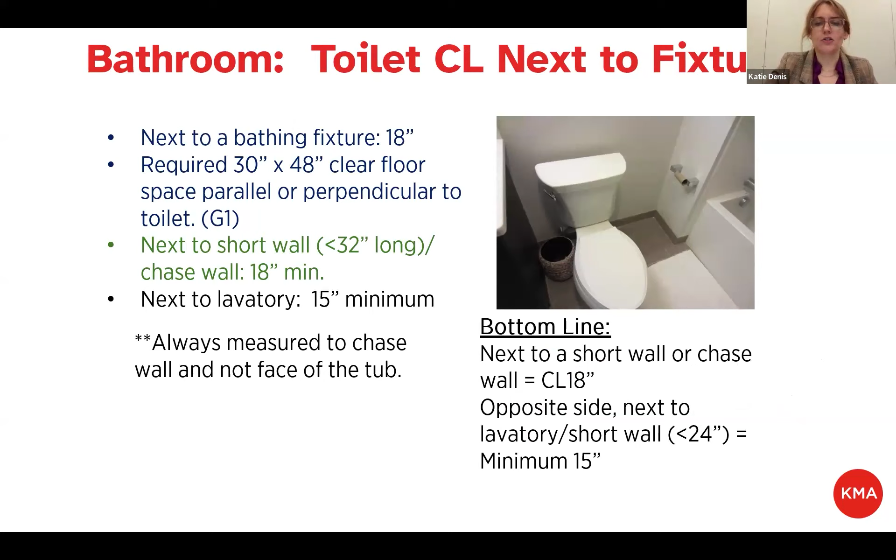Toilet center lines, when you're next to a short wall, it has to be 18 inches to meet both FHA and 521 CMR, and 15 inches minimum to an adjacent lavatory. Note, if there is an adjacent lavatory or fixture next to it, it cannot extend more than 24 inches deep. If you have a toilet next to a bathing fixture, it should be 18 inches to the chase wall. So that 18-inch rule kind of applies everywhere, and that same 15 inches minimum to the lavatory or short wall also applies. So here's a bunch of examples.

Toilet center lines are something we see often get a little askew. The top left picture is showing you they don't have the 33 inches clear, so 18 plus 15 at your toilet, because of the sink overhang, so they had to cut that back. And then in the bottom picture, you can see a toilet center line at 19 inches and not 18 inches, so that would be flagged.

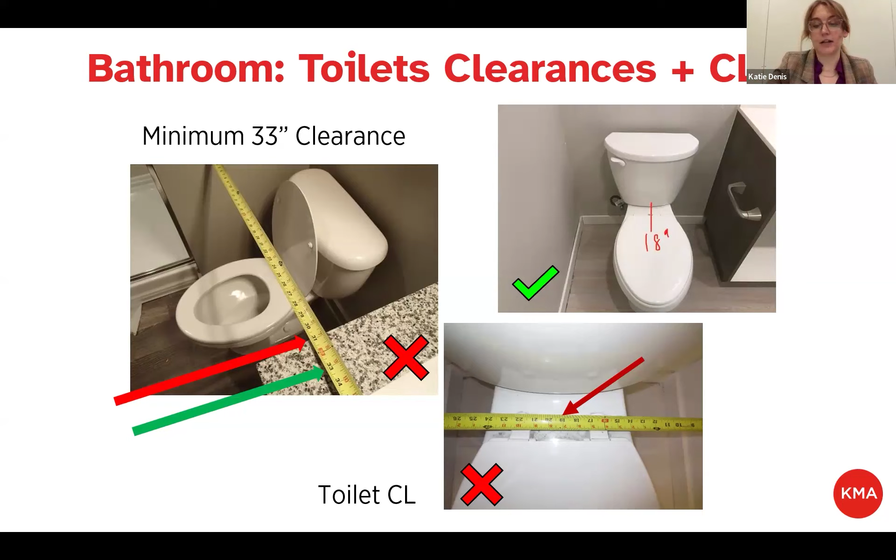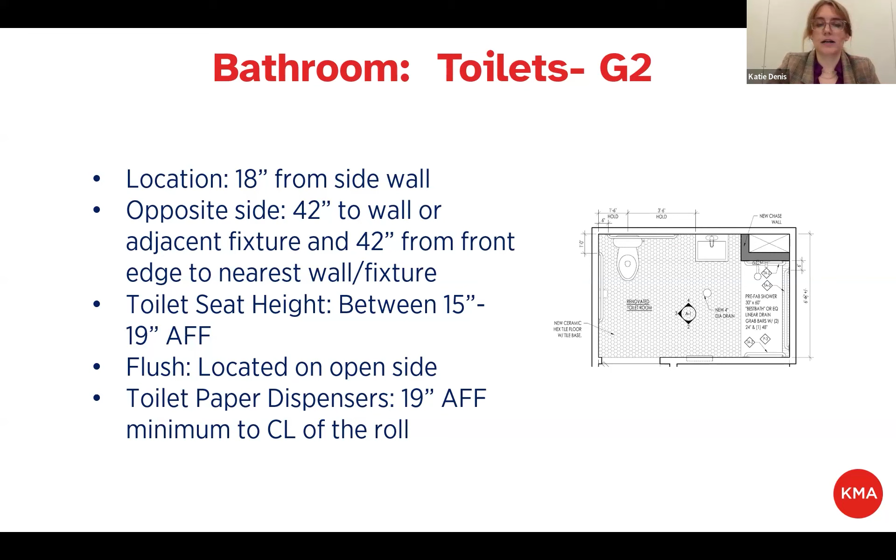In your group 2 bathrooms, there's a bunch of requirements for the toilets. The 18-inch rule still applies for the toilet center line, but you also need 42 inches from the center line to the adjacent lavatory or whatever's closest to it, and 42 inches from the front edge of the toilet to the opposing wall. The seat has to be between 15 to 19. The flush has to be on the open side. And if you have a toilet paper dispenser, it has to be minimum 19 inches.

Lavatories need a clear floor space. And if you can't provide a parallel 30 by 48 centered on the fixture, you need easily removable cabinets for a forward approach. That means the floor, walls, sides are all finished so they can be easily removed.

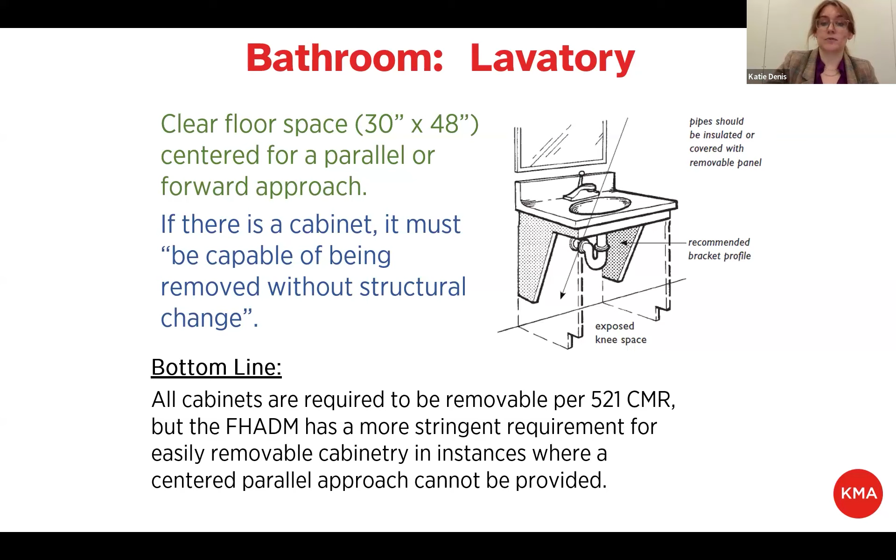Tubs. 521 CMR is generally more stringent here. You need a 30 by 48 parallel to the tub for a group 1 unit. However, if you're using FHA Spec B bathrooms, the FHA Spec B requirement is that clear floor space is measured flush from the control wall. So it is a little more stringent, in that FHA would require it to be measured 30 by 48 flush from the control wall, whereas 521 CMR is 30 by 48 with the 48 anywhere along that tub. So that's just something to keep in mind.

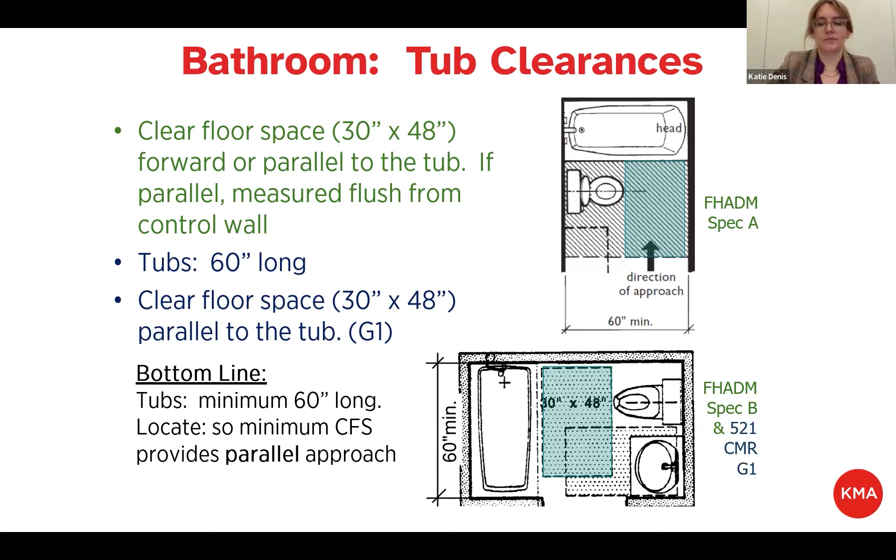And in group 2, your tubs need a 30 by 72 clear floor space with 12 inches beyond the drain edge of the tub, and it can't overlap other fixtures. The mixing valves of your tub have to be centered on the long wall at 28 inches above finished floor.

Showers have to be 36 by 36 minimum. And they require a 30 by 48 parallel clear floor space, both centered on the fixture per 521 CMR, and measured flush from the control wall per FHA.

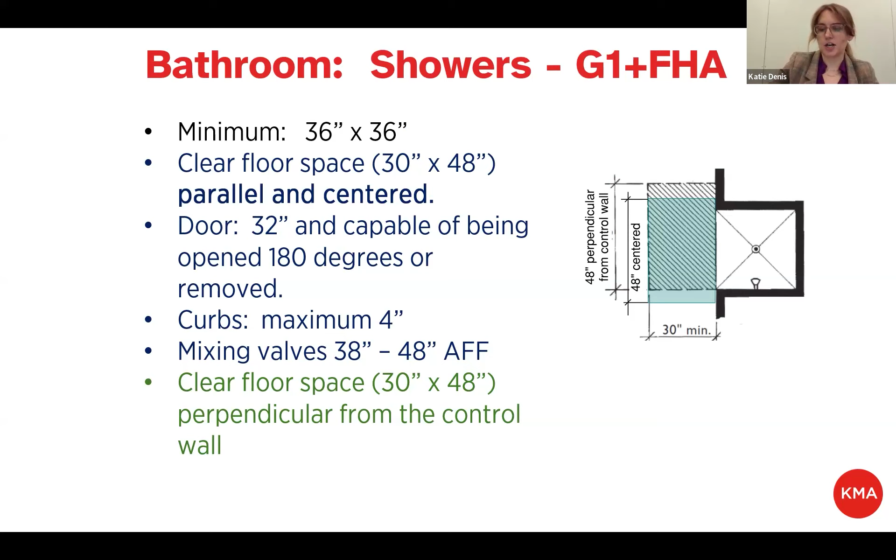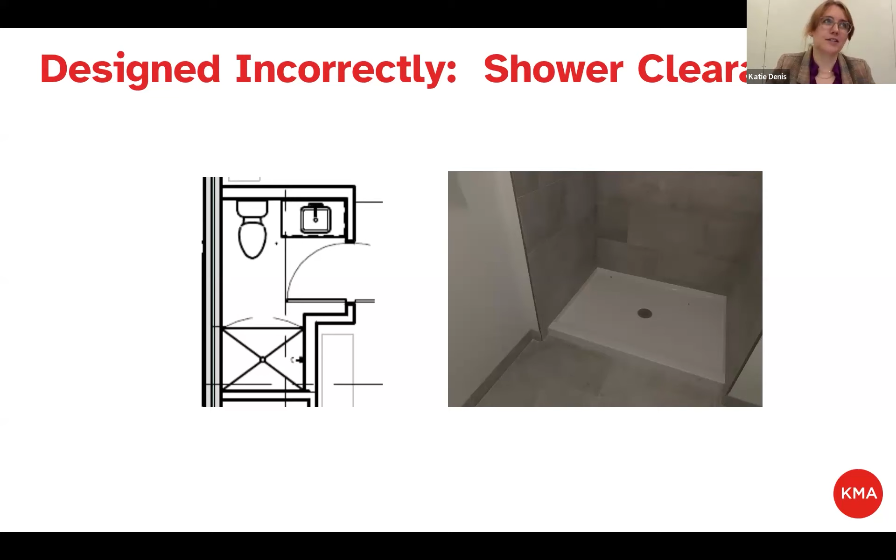This is a common area we see come up in Massachusetts, where in the drawings they'll spec a 48-inch shower pan, which looks great. If I measured this out, if I was reviewing the plans, that would meet the minimum dimensional clear floor space requirements. However, in the field, once they add finishes, if you use a 48-inch shower pan, those typically do not provide the required 30 by 48, with the 48-inch dimension measured flush from the control wall. So on the right-hand side, you'll see a picture where they notched out a few inches at the foot end of the wall, so that way they guarantee their 48 inches of clear floor space. This is an issue we see come up often in litigation. So I highly recommend reviewing your shower clearances. And if you have 48-inch shower pans, think about how are we providing those clearances. It usually involves notching out a piece of the wall.

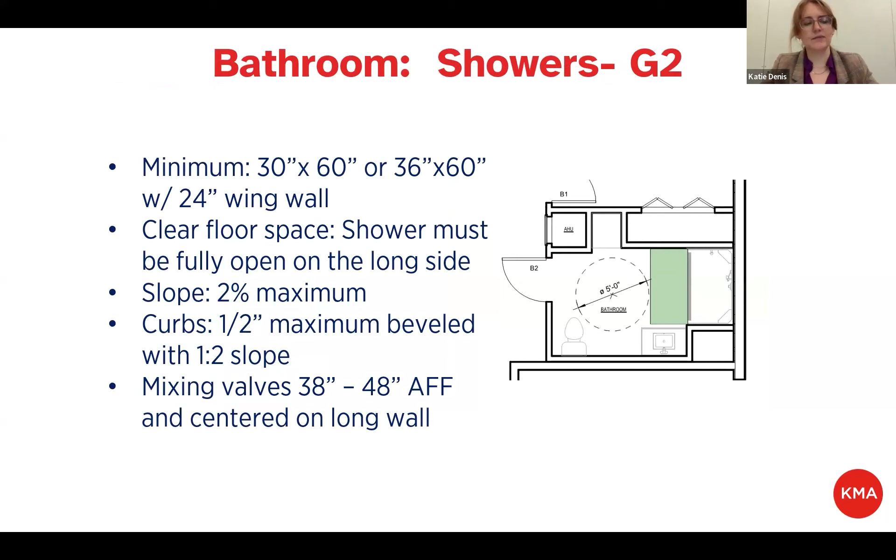Group 2, you are required to do a 30 by 60 or 36 by 60 with a wing wall shower. It's a roll-in type. It must be fully open on the long side, maximum 2% slope in the shower, and the curb has to be a half inch high, beveled with a 1 to 2 slope. And the mixing valves have to be centered horizontally on the long wall.

Now we're at our recommendations. Hopefully that wasn't too overwhelming. And like I said earlier, I'm sharing all these requirements so you will think about them. Next time you look at a shower, maybe you'll think, hey, there's something weird about clear floor space, and that would be a win in my book.

But I also have these recommendations for your projects as you're going forward. Number one is think about accessibility early and often, especially at the initial planning phases. Number two is budget for accessibility, I can't emphasize this enough. It's often we'll get calls from clients way too late in the game, and scrambling for budget later on is a challenge. Establishing protocols for when third-party accessibility reviews are required is something we highly recommend.

You can set a protocol for projects of certain sizes or scale to make sure someone's thinking about this. Attend trainings—I have another slide with resources for that. Ask for help. You'll have my email as well as a bunch of resources you can reach out to for help with all of this.

Ensure the architects, contractors, and inspectors are reviewing for accessibility. It's everyone's responsibility to be frequently checking for this, and perform routine construction visits to monitor and mitigate conditions in the field. There's lots of areas for issues to arise, so it's not enough to do just one plan review—it should extend the whole life of the project.

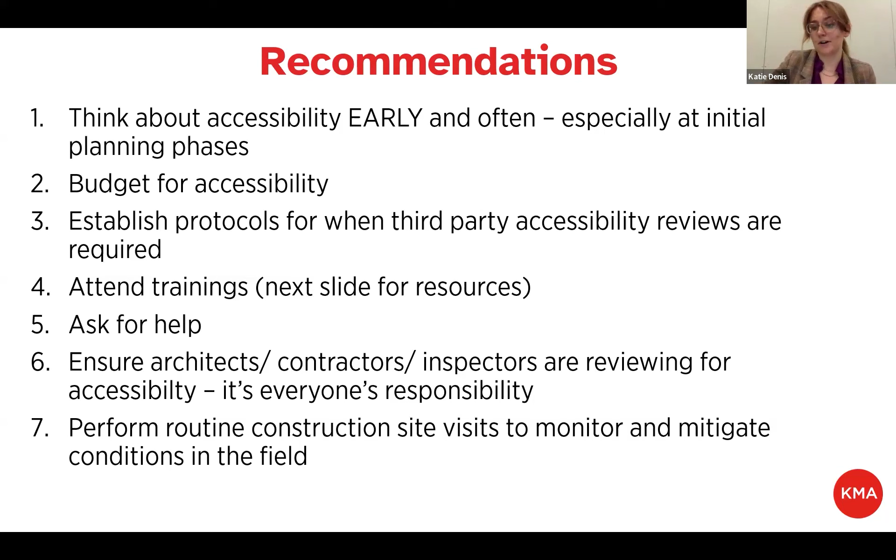And now we've made it to our Q&A portion of the session. But before I open the chat and start reading questions...